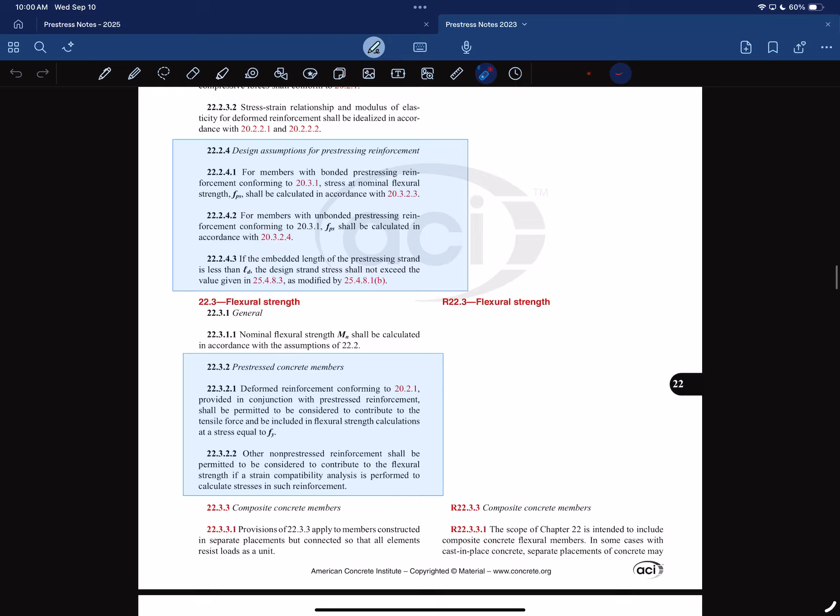Unlucky dude. Lucky and unlucky dude.

You should convince him to go back and go on his trip this weekend so we don't have to go to class on Friday. I agree. What's he doing now? He was supposed to be going on a trip, but his buddy canceled. So now he's not going on the trip, so now we're going to have class.

I was told I wasn't allowed to tell you about this trip, because he said he was going to let you know on Thursday, and it was going to be a surprise. But then I was sworn to secrecy. You swore me to secrecy. I still told you. That came back on me, told him. That's what I told Kyle. I was like, well, I kind of owe them because they're tattling on you, so I owe them.

How'd Tim find out it was me? He didn't. You gave it away. He just assumed it, and you didn't deny it. It was a classic trick, got me.

He got you, right? He was just like, oh, I think it's Kyle. And I didn't deny it. The only thing I broke on was I was using pronouns. I said he, and so he just threw out your name, and then he confronted you, and you gave it away. He doesn't really narrow it down that much in engineering. I took out just a couple, overlap between the two classes. If you said she, that would have been close.

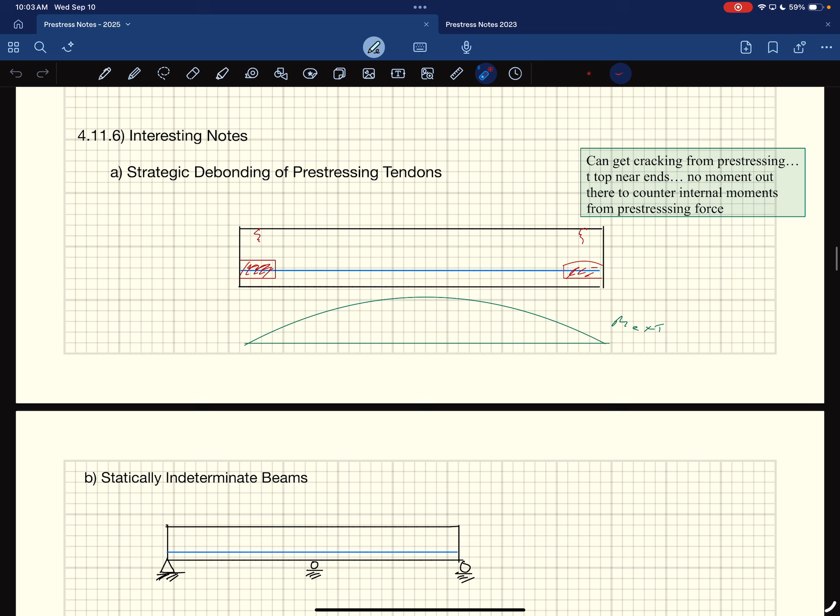So these are Magnel diagrams, but we talked about these being the ways that we design it. We talked about how we're kind of done with the elastic analysis. You're working on, or should be working on, a homework associated with this. We talked about debonding the pre-stressing because near the ends, if you have a constant eccentricity, you have this internal moment, and then there's no external moment to cancel it out, so you could end up with cracking up at the top. But if we debond it near the end, or harp it, or drape it, that prevents having problems there.

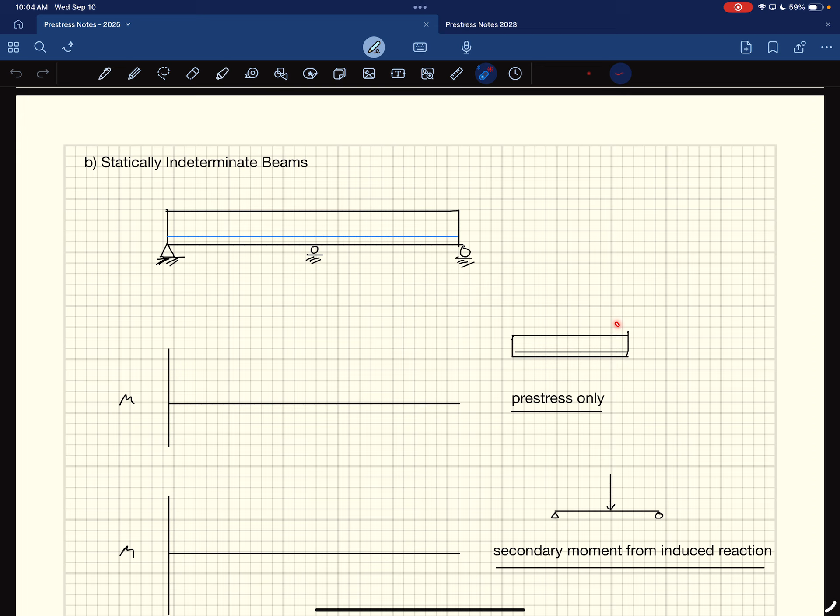Okay, so what we were in the middle of talking about now is statically indeterminate beams. When you have statically indeterminate beams, some weird things can happen, right? So if we have just the pre-stressing only, we're going to break this into pre-stressing and then what effects it has.

So for pre-stressing, the effect would be our moments would look like this. They're not exactly like this though, because there's the whole development length thing happening, and it takes a while to ramp up. In reality, because of development lengths, it's more like this—it kind of ramps up on either end. But just theoretically, if we ignore that component, you get a constant internal moment from this, right?

Because you have that pre-stressing causing this thing to pop up, which is like two big forces down at the bottom, and it's constant along the entire length, right? Also, I said this last time, you wouldn't do this. You wouldn't have that pre-stressing along the bottom knowing that it's supported in the middle. But this is just for describing what's happening, okay?

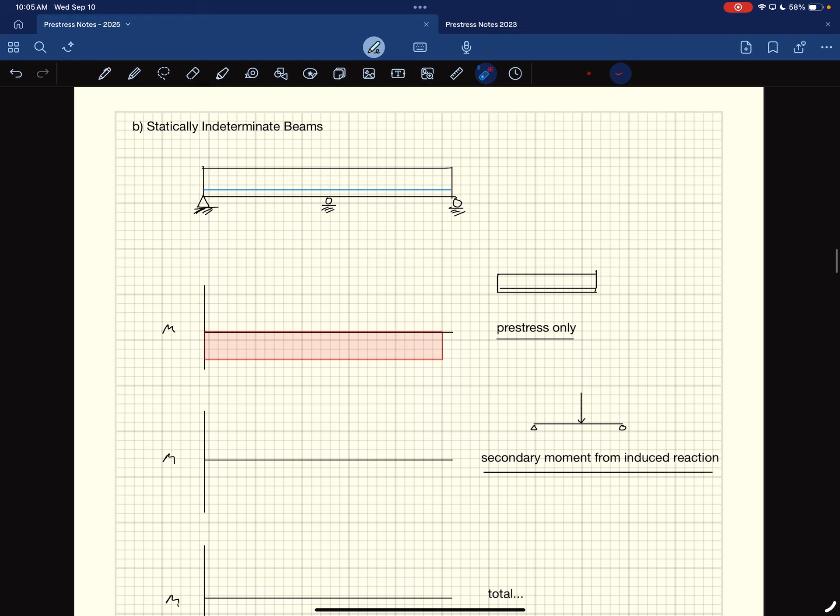So we have that pre-stress only. This will cause the thing to want to pop up, right? You're causing this negative moment. It's going to make this thing pop up. Or you could think of these things as, this is what the moments would look like. Kind of going like this, and it's going to make it want to pop up like that.

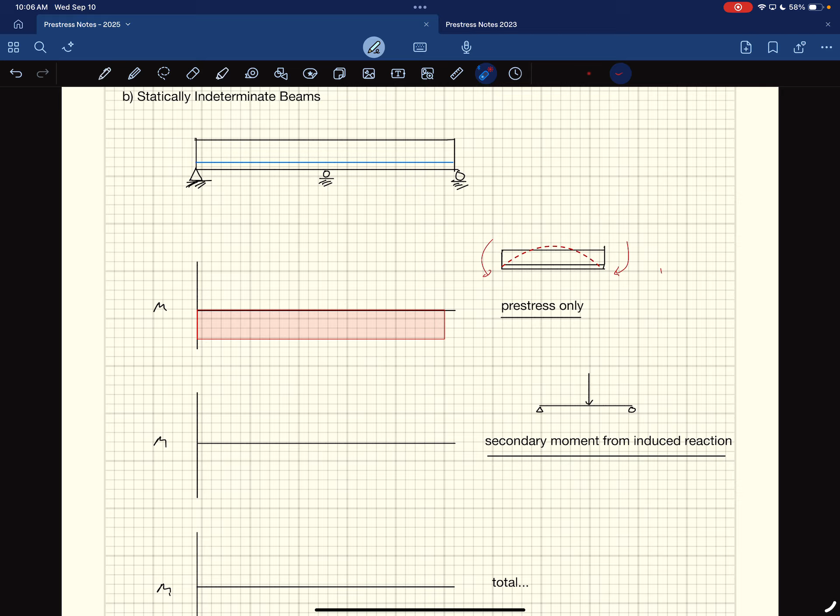But then it can't pop up like that because there is this component right here. There's this point right here. Even though we always draw it as like a bearing, just like a roller, really, it does provide a vertical load as well. And so then that would cause a moment or a force that looks like this. The reaction would cause a downward force in the middle. And the moments from that would look like...

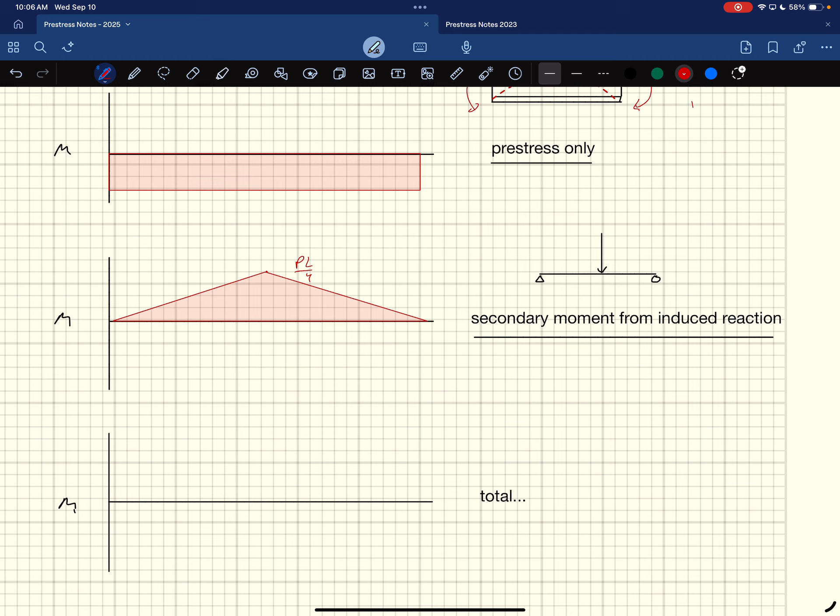I don't want that, I want solid lines. That work? Your moments from there would look like that. And this would be PL over 4, right? And kind of what that moment would look like from just a point load in the middle. And then the total loads, or the total moment, would be the combination of both of those things.

Maybe something like this. The total would look like that, right? These moments caused by that fixed support, Stanton calls them the secondary moments. He calls them secondary moments because they're not from an external load. They're actually from the internal load, and they come about because of that support condition there, and they resist the deflections that internal moment would want to cause.

Kyle, when he teaches our class, these come about a lot, like I mentioned before, in post-tension floor design, because you're going like this as you go along, and you're not going to be perfect with that as you're going up and down as you go across. And there's going to be parts where you have this secondary moment that comes about, okay?

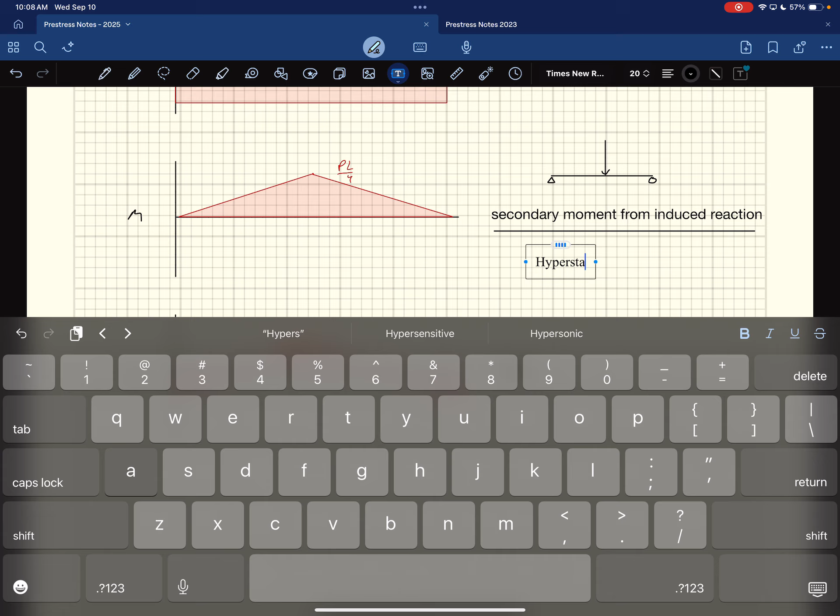And they call this hyperstatic. They're called hyperstatic moments, that's how you use it. I had never heard that term. Stanton doesn't use that term, but Kyle uses that term.

Everybody kind of see that? This is a thing, and we're going to see it at some point. That's about all I want you to do with it. We're not actually going to calculate any of the stuff, but just that this exists, and be wary of it. And then computer programs will calculate it for you because it gets pretty complicated.

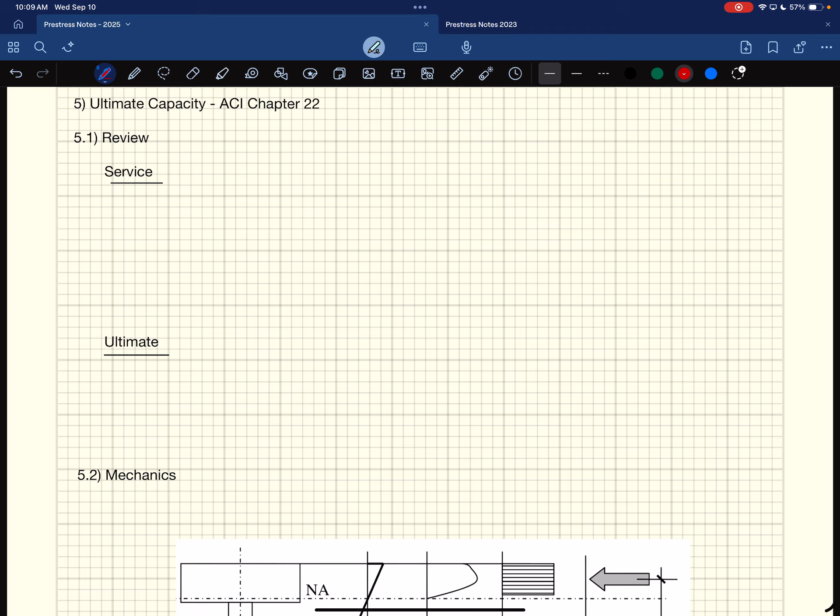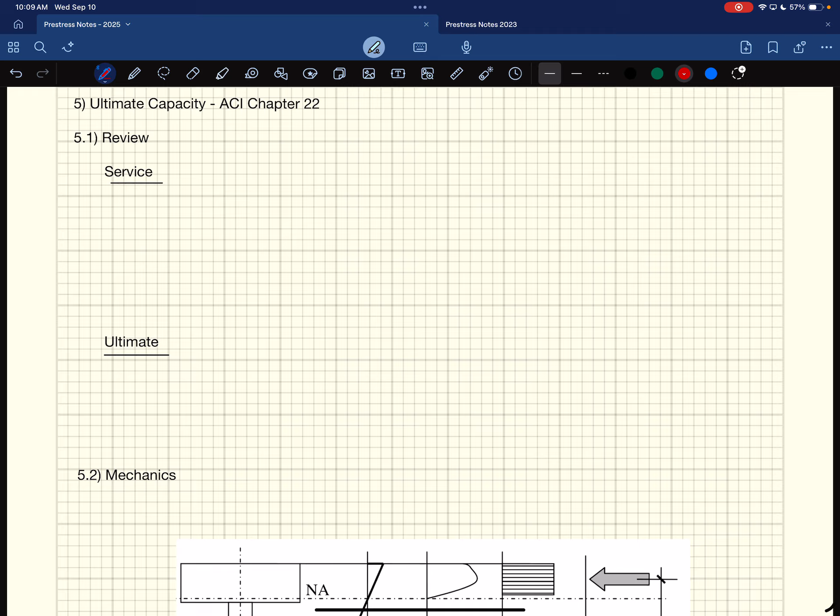I already called Hudson out, but you got yours in. Did you get yours in? I didn't see yours in there. Yeah, you did? I did. Grade school? Yeah, I didn't see it. You look - good acting, by the way. Any other guilty people? By the way, I heard Will 1 just got demoted back down to Will 3. But Tim's not willing to put you up at Will 2 yet. Because he's not going to grad school, so he bumped it back down. He said he's not going to grad school, so Tim demoted him back down to Will 3. So currently there's no Will 1. Still Will 2, you're still Will 2. Yeah, he didn't promote you, you're still Will 2. Just make sure you call Will out when you see him, that he's back down to Will 3. And then he was arguing this morning that he wasn't technically Will 3 again, and he was having a conversation, and then Tim walked around the corner and goes, 'Oh yeah, you're Will 3.' So it's happening.

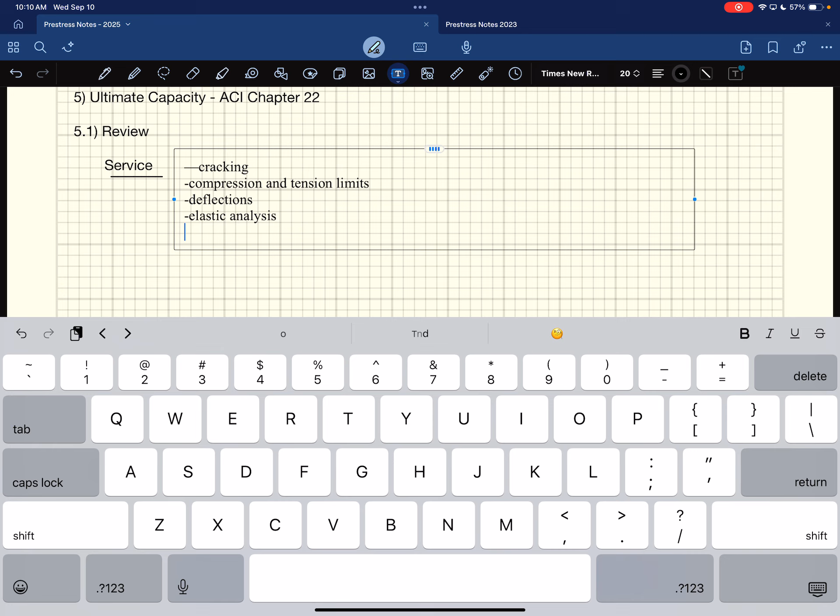Cracking. Okay, so things that we dealt with in service loads, just kind of point these things out. What we cared about is cracking, we cared about compression and tension limits. And this is backwards, right? Usually we care about life safety first, but in pre-stress, we flip it around. This is all elastic analysis, just throwing some words out there. We deal with service loads when we do these things, okay? And then people don't die if you mess this up.

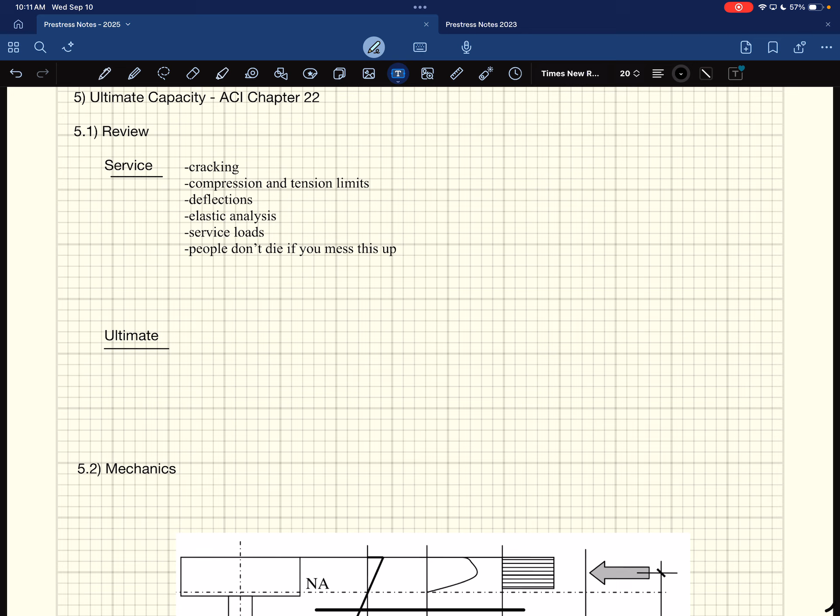People don't die if you mess this up, right? And because of that, we use service loads. You're doing elastic analysis, but we do start with service. We haven't talked about deflections yet - that's coming, that's one of the next things we'll look at, calculating deflection. It turns out it's really hard, but we have looked at the cracking and the compression and tension limits.

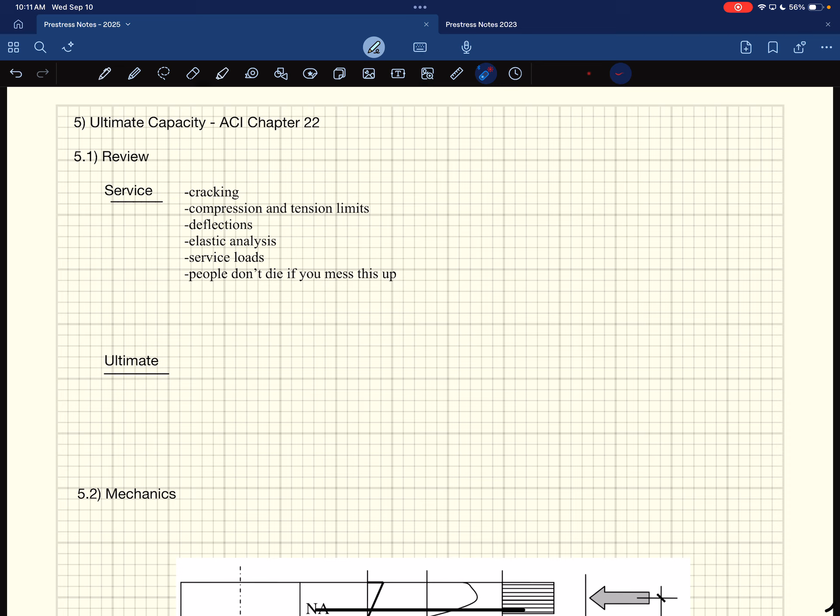Okay, but now we obviously do care if people die. So after you get done designing the beam to meet the requirements up above, we then come back and design for the ultimate load. Right? People could die if you mess this up.

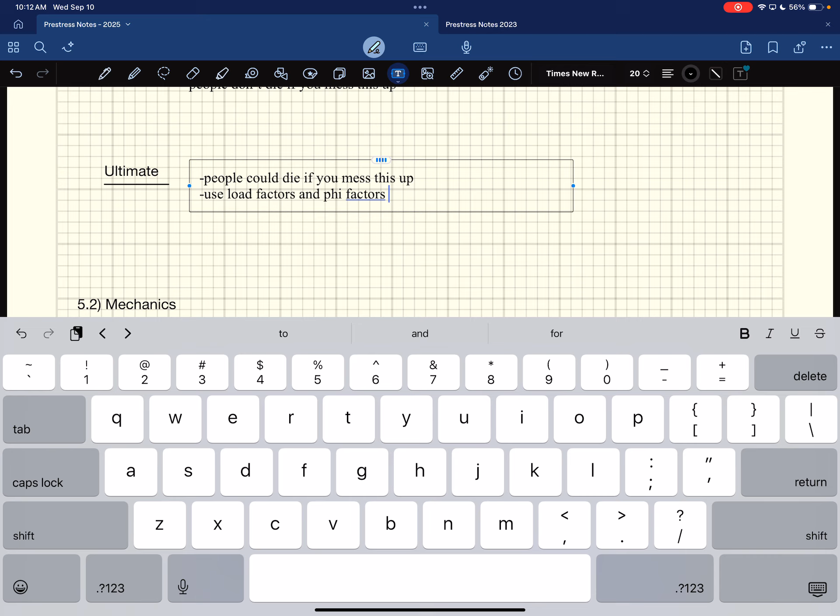Therefore, we use load factors and phi factors. Thus far we haven't used those - there hasn't been any talk of factoring our loads or reducing our capacities. That's what they do. With LRFD, we pretend our loads are bigger than they actually are, and then we pretend our capacities are less than they actually are. And that way we have factors of safety coming from both sides.

And so we also use nonlinear analysis. This is more accurate, less conservative.

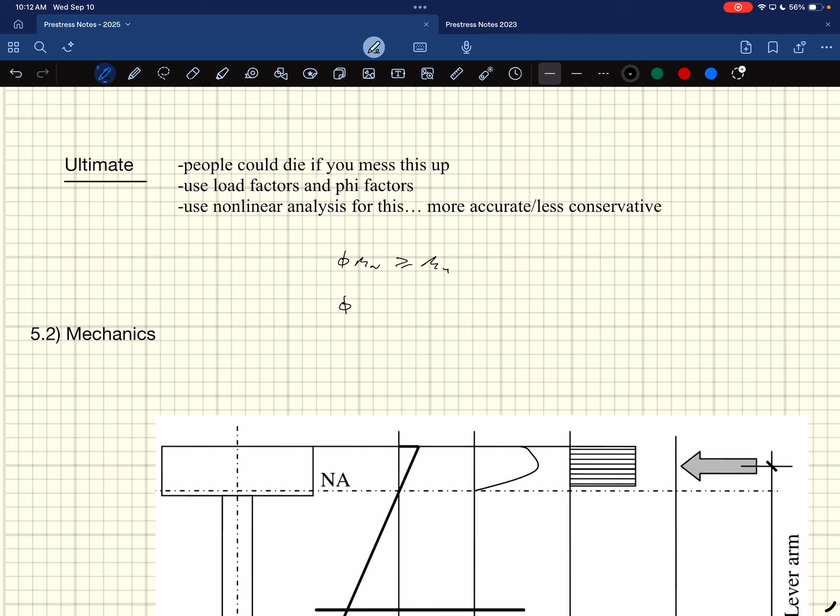And what we're going to talk about in this class - these are what we have to make sure happens. Phi Mn has to be greater than or equal to Mu, and phi Vn has to be greater than or equal to Vu. We're going to do both of these. We're going to start out with the moment capacity. We're not going to spend much time on Mu, what our demands are, but we are going to focus on the phi Mn side of things. And then we'll go on to phi Vn, which actually gets pretty complicated when we do that.

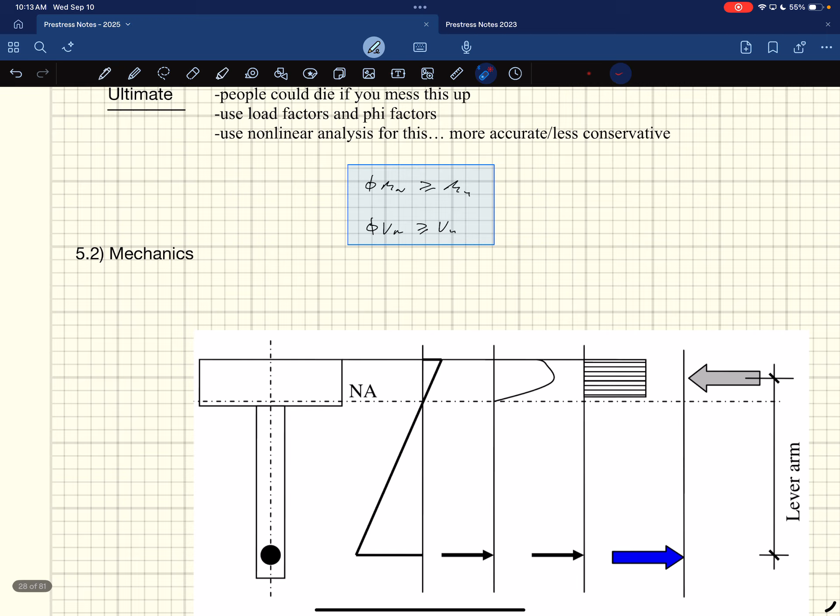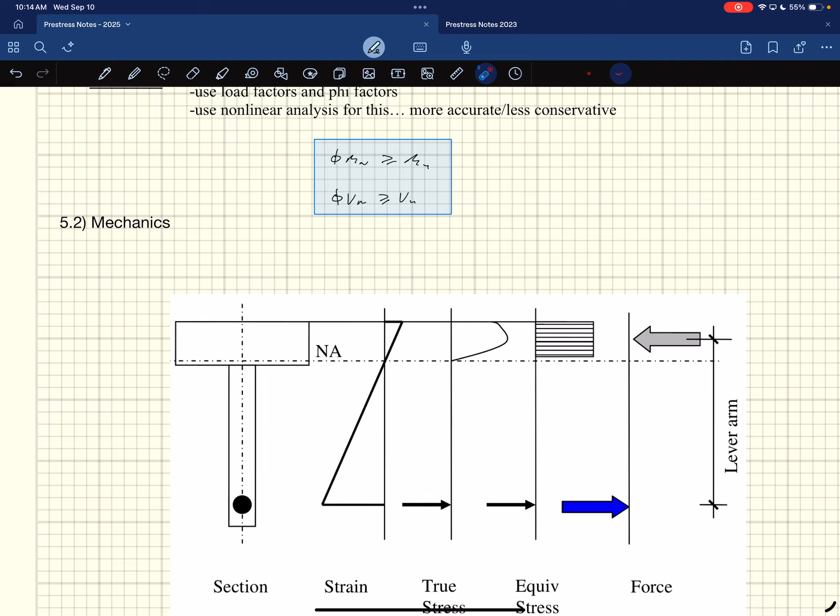Also, you'd be surprised how many people mess this up in structures too. They flip these around - they say that phi Mn has to be less than Mu, and you've probably seen it in some homeworks, right Kira? No, you haven't seen it yet. On exams, people throw that. They flip it around and they're like, 'that worked, therefore you're okay.' You're like, oh my god, we're gonna guarantee people are gonna die. It seems pretty obvious, but capacity has to be greater than demand, right? And if you flip that... I think it's just a brain fart, but they're panicking on an exam, still pretty funny. Do they just mix up the variables, or do they mix up the numbers too? I know they calculate this number and that number, and they're like great, and it'll be not good, and they'll say, oh that worked, we're good to go. You're like, oh god, the opposite, for fuck's sake. If you get anything out of this class, make sure your capacity exceeds the demand, no matter what. And then they mess it up. At least you find the point where they bifurcate. But now I just want to pull the card, be like, all right, you're done, you're not going. It's done, you're out.

Okay, so when we calculate this, I've got to mention this - this hurts me. As an academic, I really like this thing called the strain compatibility way of calculating capacities, and it takes literally 3 days to teach you guys how to do it. And this year, I'm not gonna do it, and it pisses me off. All our notes have it built in, so I've got to work my way around it. I'm as an academic, I'm gonna still discuss it with you a little bit, but I'm not gonna make you do it. The reason is I want to spend more time on post-tension floor design, because I know as a real engineer, you will never use strain compatibility, even though it's super cool. You won't do it in the real world, and it pains me to do this.

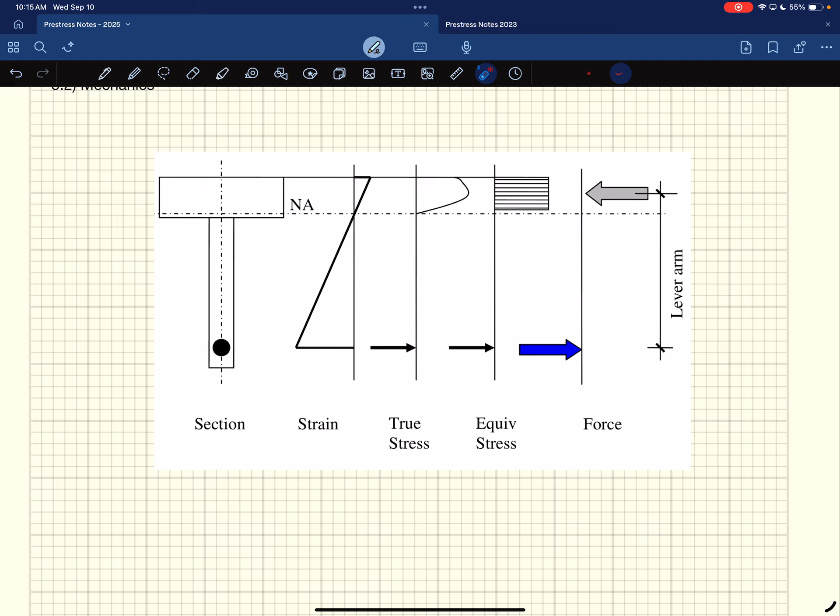So this is just a review, and we'll talk about how it differs from pre-stressed concrete. But this is just a review of standard analysis, you'd do this on regular reinforced concrete as well, right?

So you start out, here's what your cross section looks like, and you've got your big pre-stressing down at the bottom, right? So this is obviously a T-shaped section. So what you do is you start out with the strains, right? You make the same assumptions, plane sections remain plane. You have a strain distribution going across like this.

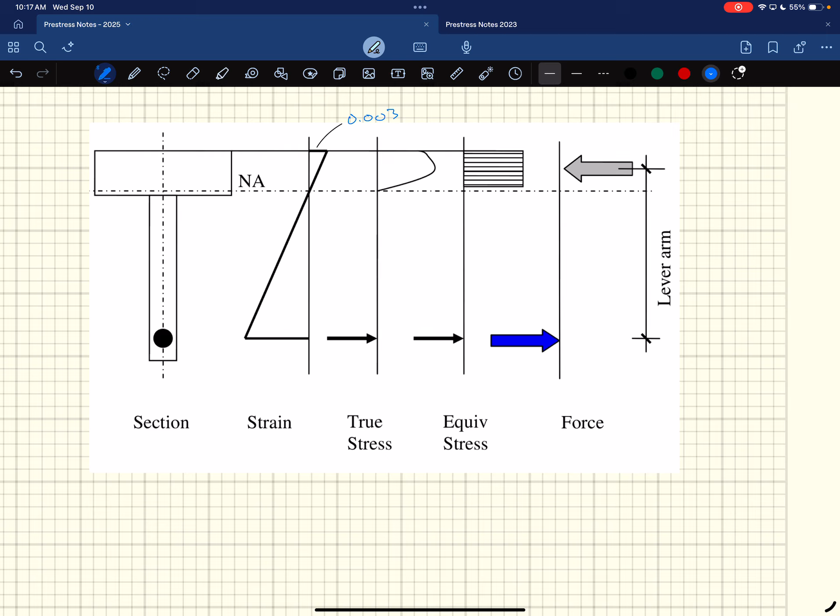What is this strain up here at the top? 0.003, right? We make that assumption always, that's the strain at which concrete crushes. We still make that assumption, the strain in the concrete is going to be 0.003, right? Down at the bottom here, we'll call this epsilon sub PS or epsilon sub PU. It'll be one of those, we'll differentiate them in a little bit, okay?

Given those strains, given the strain distribution like that, and assuming it's linear, given those strains, you can calculate where that neutral axis is. That's going to be a function of x. That distance right there is going to be x. That's what we end up ultimately solving for, is where that neutral axis is, right? So it's kind of unknown when we go in here is what that neutral axis is, right?

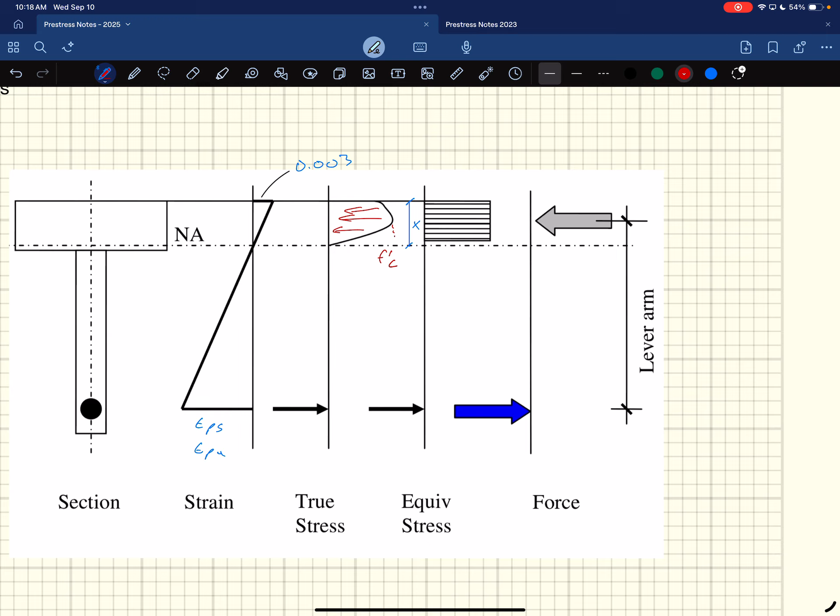What my actual concrete strains are doing is this, or stresses rather. It's a nonlinear stress distribution, right? This right here would be your F prime C. Down here at the bottom, you'd have FPS, our stress in our pre-stressing would be what we call FPS down at the bottom, right? To make things a little bit easier, we use this block right here. What's that block called? Whitney stress block.

So this is all just review on regular reinforced concrete, we use the same mechanics, right? 0.85 F prime C is that dimension. This dimension is beta 1 times X, right? We call it A a lot of times.

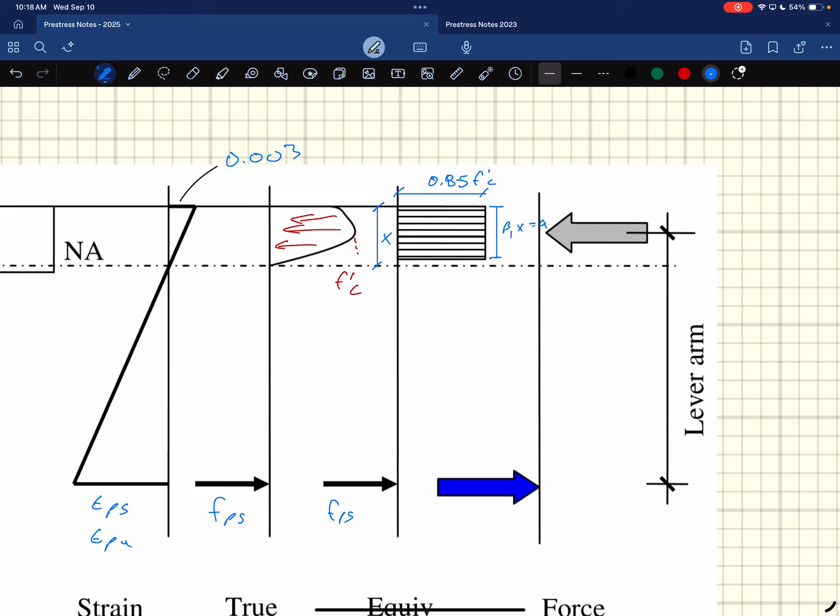Okay, same thing down here, this is still just FPS. Okay, and so that's what you do, you go strain, you go section, strain, stresses, equivalent stresses, and then you go on to forces, right? You take the forces, you just take these stresses down here and multiply them by their areas. So up here, this is just going to be C is equal to 0.85 F prime C, A times B. This would be B up here.

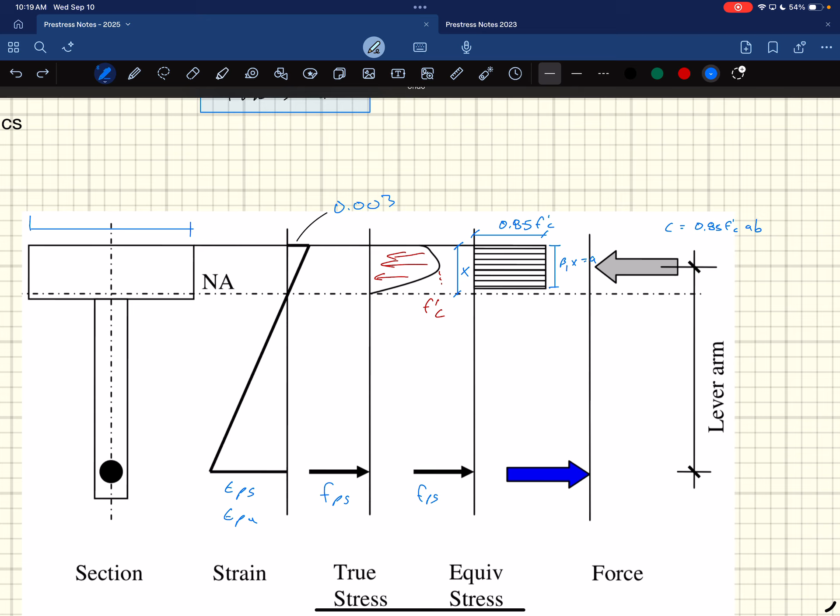This would only work if it stays up, it only works if it stays up in the flange up there. This equation right here only works if it stays up there. If it starts dipping down, then you have to do more stuff to it, there'll be more components that go into that compression force, right?

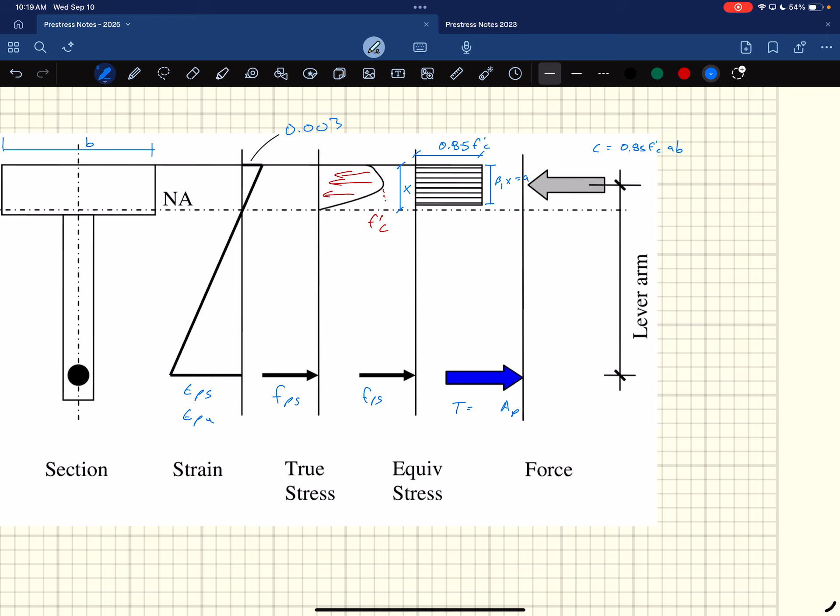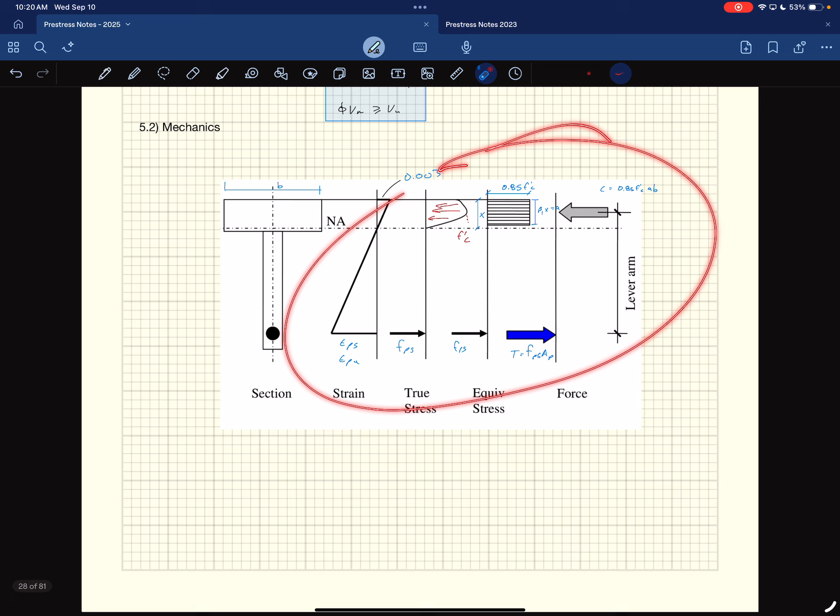And then down at the bottom, that T, FPS times AP. That's an F there. Times AP, okay? And what we do to solve this, right? Like I said, the only unknown in this, well there's a couple unknowns, we'll talk about that. But really, usually, if I know what my FPS is, if I could tell you what the FPS is, the only unknown in this is that A, where the neutral axis is.

So what you do is that this T has to be equal to this C, right? C equals T, that has to happen, otherwise this thing would be accelerating, right? It would be spinning, right? So C has to be equal to T to have that equilibrium, right? And so that's what you do, you set C equal to T, you apply equilibrium, and solve for A or X.

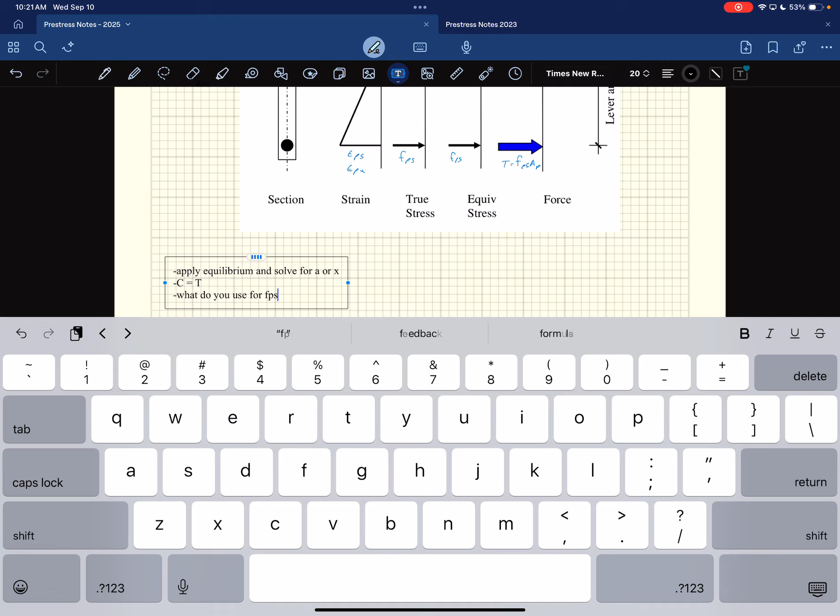Right? What is that, A or X? By applying that, you set C equal to T. But where things get complicated, you're like, oh, I could do that. Where things get complicated is, what do you use for...

FPS? In regular reinforced concrete, we assume that's FY. We assume, and actually the code tells you that has to happen. If you're doing a regular reinforced concrete beam, your steel has to yield, you have to go beyond that yield. We don't have a yield point because this is the pre-stressing strands. These are the pre-stressing strands, they don't have a yield point.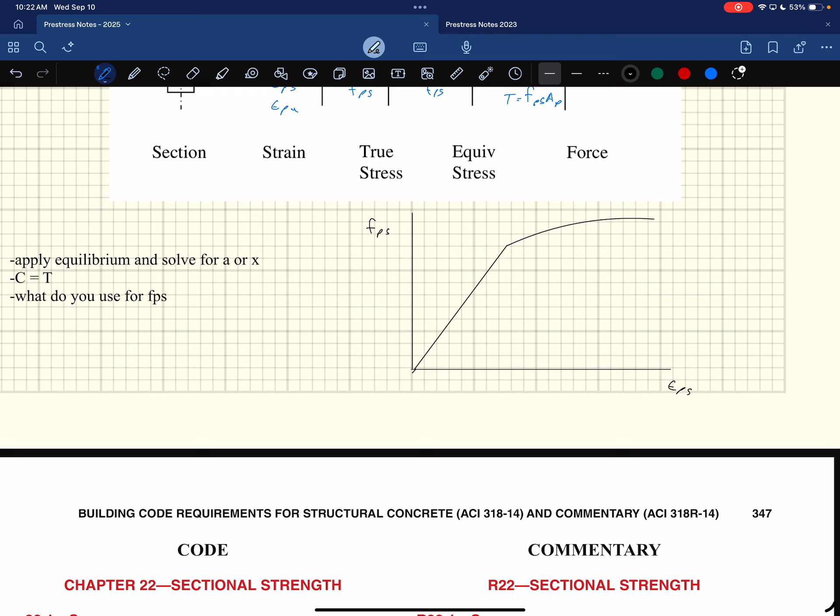And so what do we use? But it's not, FY doesn't necessarily make sense. And then also to complicate things, before you've even loaded this, that steel is already loaded, because it's been stretched first. You stretch it first, you cast the concrete, and then you release it. So it has an FPS in it to begin with. That's our pre-stressing force, so it's already being squished. So you start here someplace, you've already stressed it out to there. And then you're applying a load, and then now that load is going to change.

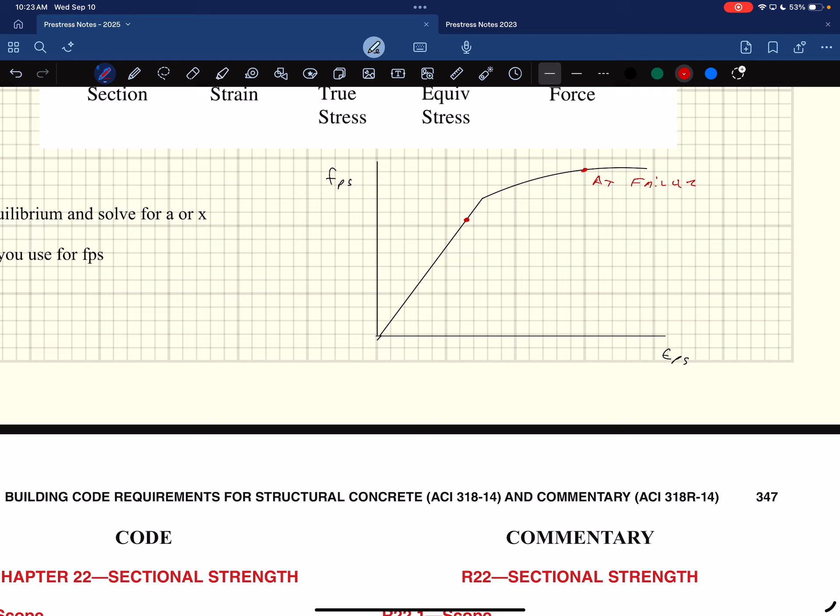In elastic analysis, we assume that the load didn't change FPS. Now it does, now we're talking about ultimate loads right at failure. Now there's a bunch of deflection that happens, and it's going to move to failure out here someplace. It doesn't have to be at the peak, but it's just going to move to the right some at failure.

Tendons start this process already stressed. Stress then moves to right when ultimate loads are applied. But how far?

And so right now I'm just setting the stage for this, that they're going to move to the right. They're already pre-stressed, they're going to move to the right. There is no such thing as an FY necessarily. So what are they going to go to? And that's where this strain compatibility comes in.

Is like if I had this equation, if I had this written as an equation, I could calculate what the amount of strain it's at, and then what the strain's going to be at failure. And then I could just plug it into this equation and get what FPS is. And that's strain compatibility. It's beautiful, okay?

Or what you're really going to do is the code gives you a value for that. I know that's what you're gonna do, you're lazy, except for three of you. And honestly, I would do it too, just because you can make mistakes if you're trying to do it. You gain very little by doing the strain compatibility. And so ACI, they punt.

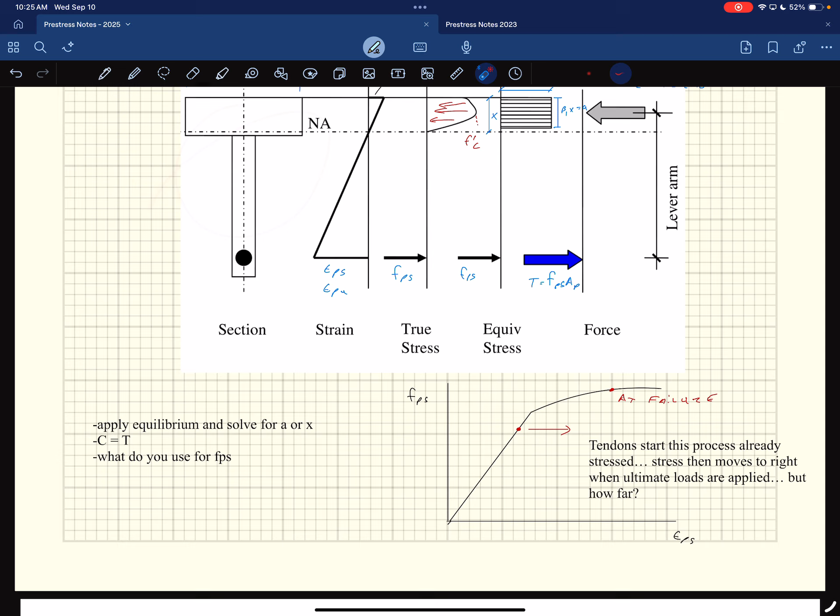They just say, hey, here's an empirical equation for what you use for FPS, period. And it's a function, it's empirical, so it's a function of a bunch of properties of the cross section. We'll look at it in a few minutes. But you just go through and it calculates FPS. So then you come back to this, and this is going to be a known value that we get from the code, and then the only unknown is going to be A, and we solve for A and then move on. So, but there are some other differences as well.

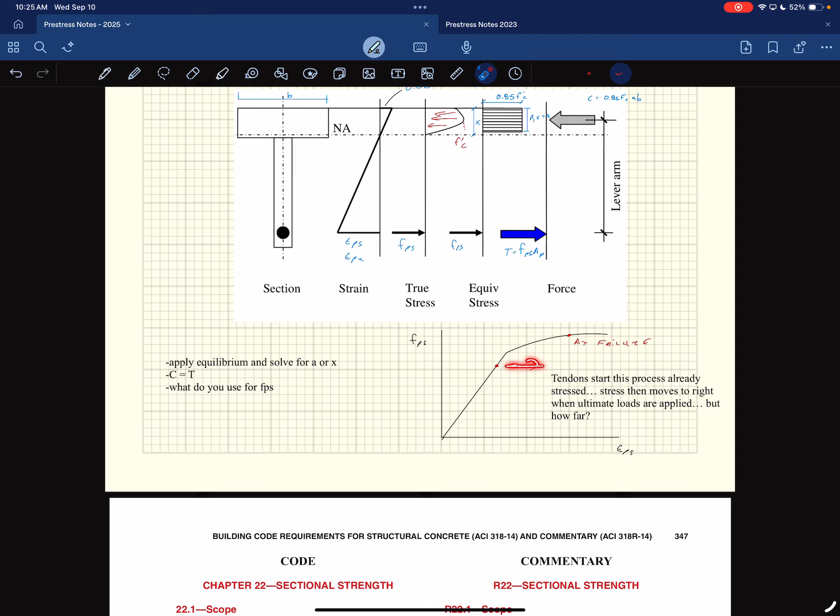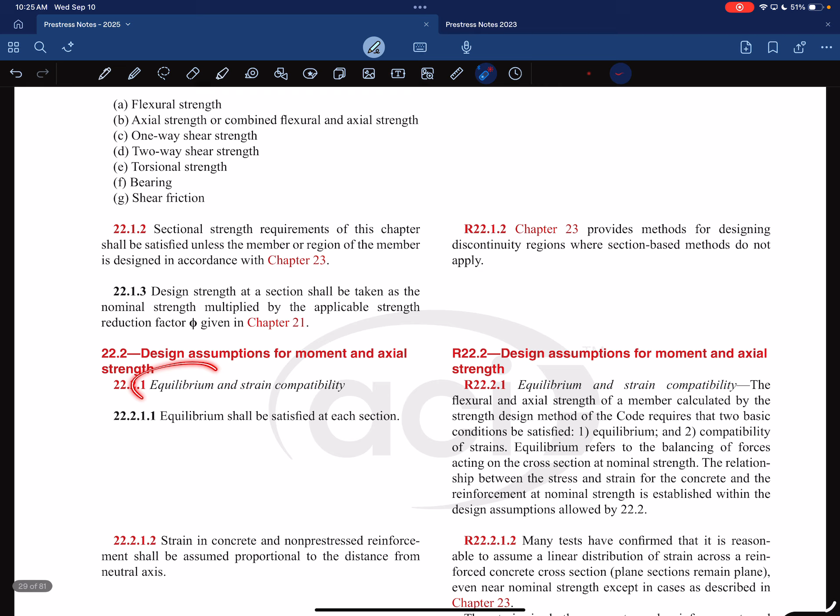This is ACI chapter 22. It's under the same section that you do for regular reinforced concrete. This is chapter 22, sectional strength, and this is where you find it. And you may not have noticed this, this is where they define all, you have to satisfy equilibrium and strain compatibility, and then equilibrium is satisfied at each section.

It's interesting how they, Tim, obviously shits on concrete a lot, because it's a big guessing game, where steel is just like pure and there's exact answers for things, and when you say the capacity is going to be something, it actually is that.

If you don't remember Structures 2, when you pull those things, it's exactly right, exactly how you calculated it.

I just think the reason Tim likes steel so much is because it's easy, and his puny brain can't handle the complexities of concrete. If you're a true concrete man, you're smart enough to do it.

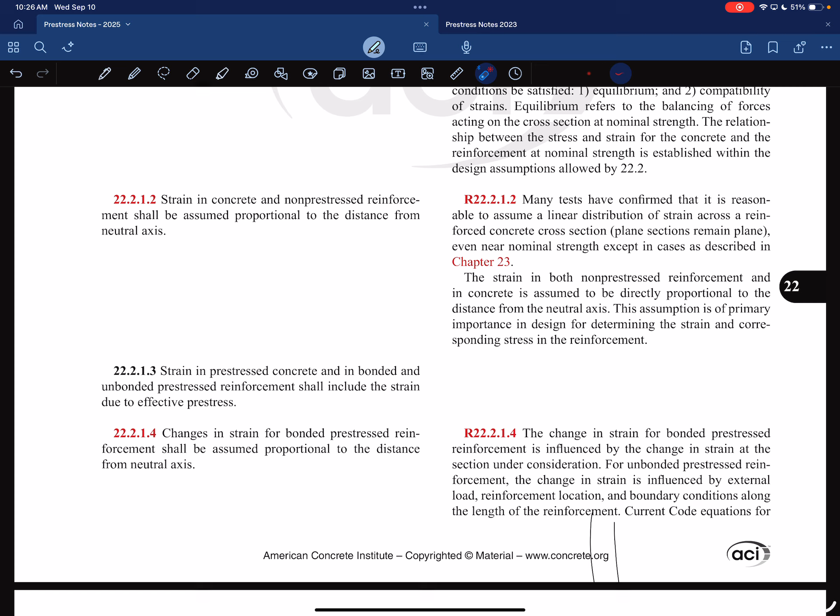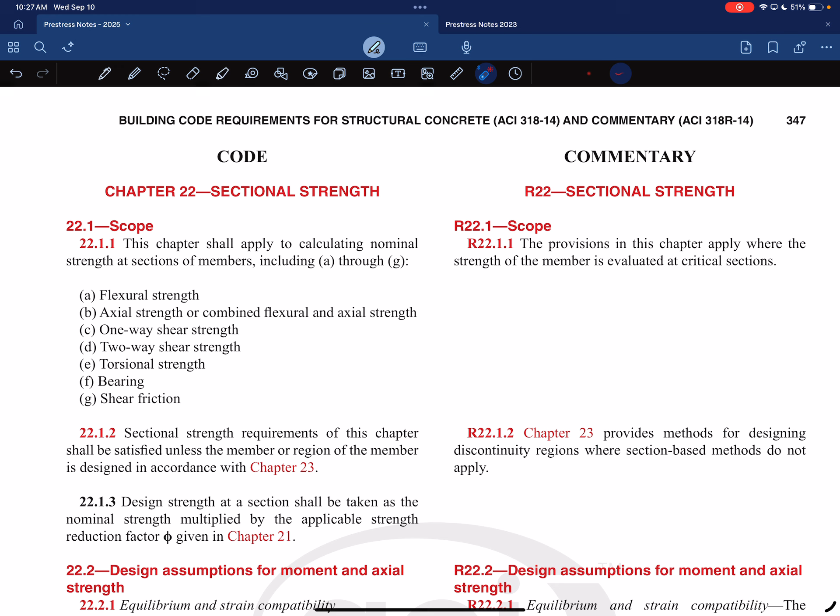But my point is this: concrete, it's mixed with a shovel, right? It's a bunch of rocks, and it's weird. It's guessing, because it breaks at really weird things, and he's absolutely right. It is hard and confusing, and the code is weird, how it's structured—there's stuff in one spot and then way over in another. It's all over the place, and you just gotta be part of the brotherhood. You gotta just know, like what each of these things are and where to find things.

But if you actually look at it, to see where it calculates this stuff, it never really says use this equation for calculating capacity. In the code, in words, it tells you this, but it doesn't ever lay it out or show you a picture for doing it. It just says your stresses can either be this, or you could use the Whitney stress block like this. You have to make sure equilibrium applies, but then you have to make sure these strains down below reach a certain value. It's really spread out all over the place.

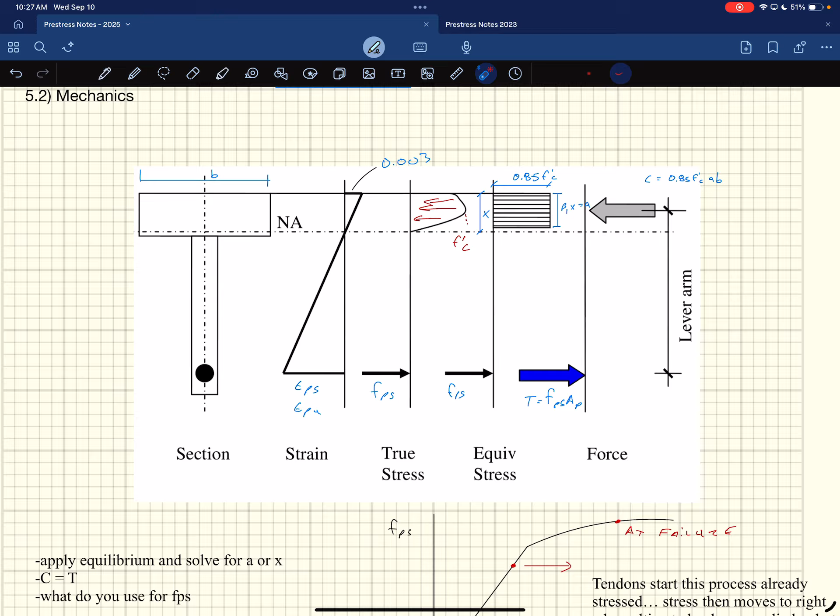But I just wanted to show you where it does mention pre-stressing. This is chapter 22. We work our way through chapter 22, all the same stuff. Here's your 0.003 for the extreme compression fiber that we talked about. Tensile strength shall be neglected, right?

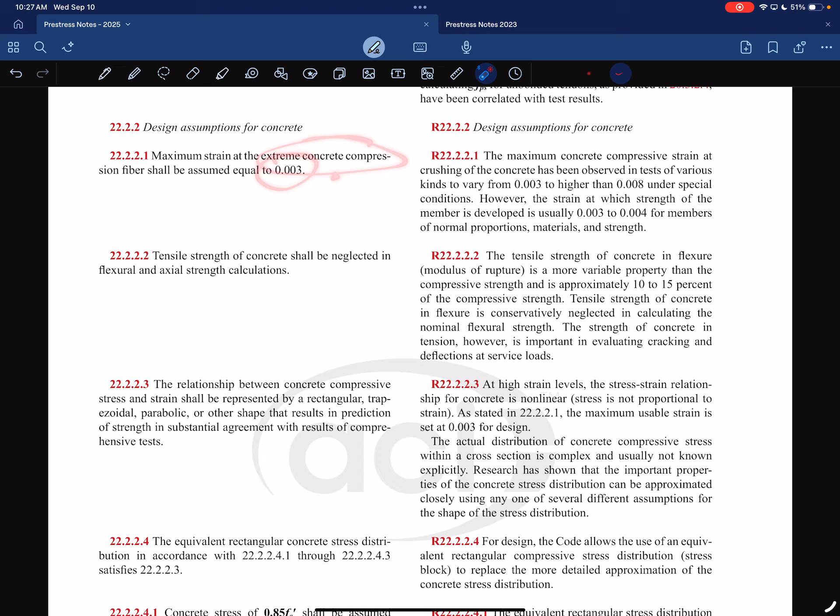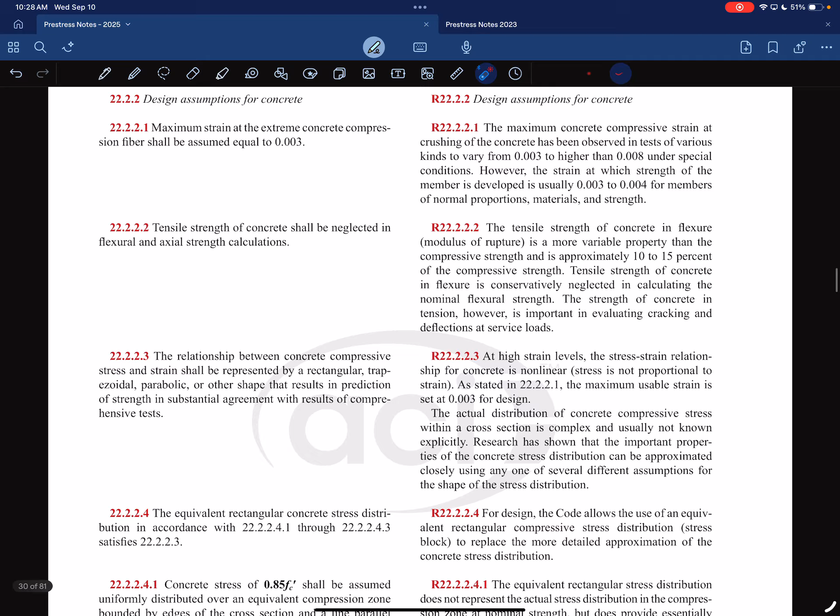We ignore—I guess I left that part out. When this goes into tension, we just ignore the concrete. Technically, the concrete does have some tensile capacity, it would keep going that direction with some tensile, but we ignore it. The reason we ignore it is because it says right in here—it says you can ignore it. You don't have to, but you can, which most people would do.

Keeps going. This is where your A is beta 1 times C. It tells you what beta 1 is going to be, here's where beta 1 is at. Deformed reinforcement, all this stuff down here—development lengths, flexural strength, general.

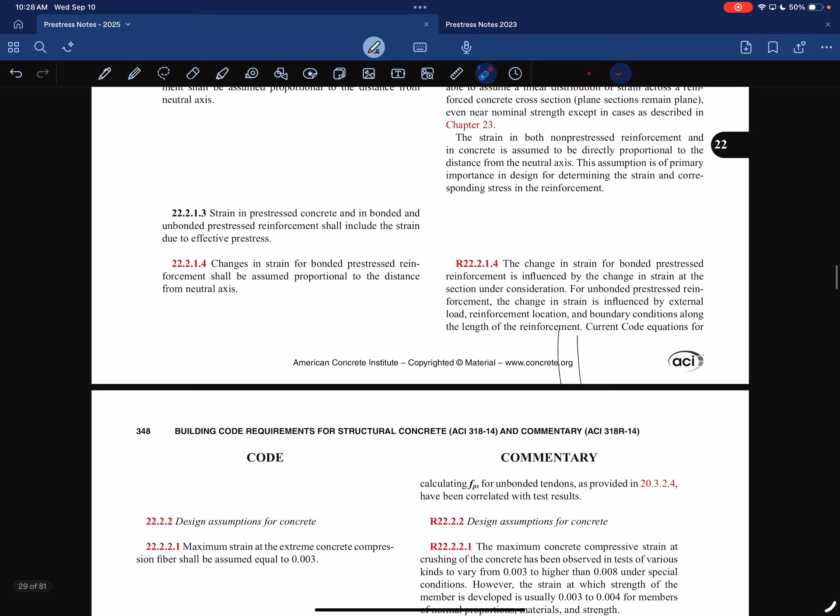Keep going. Concrete—oh shit, nothing's highlighted because I haven't highlighted it yet. So, 22.2.1.3. Here we go.

So they slip this in under where all our other stuff is at. Strain in pre-stressed concrete and in bonded and unbonded pre-stress reinforcement shall include the strain due to effective pre-stress. Oh, no shit—but it tells you that. That's just saying you have to take into consideration that it's already been strained and stressed. Clearly it'd be weird to not include the fact that it's already stretched, but it just tells you you have to do it.

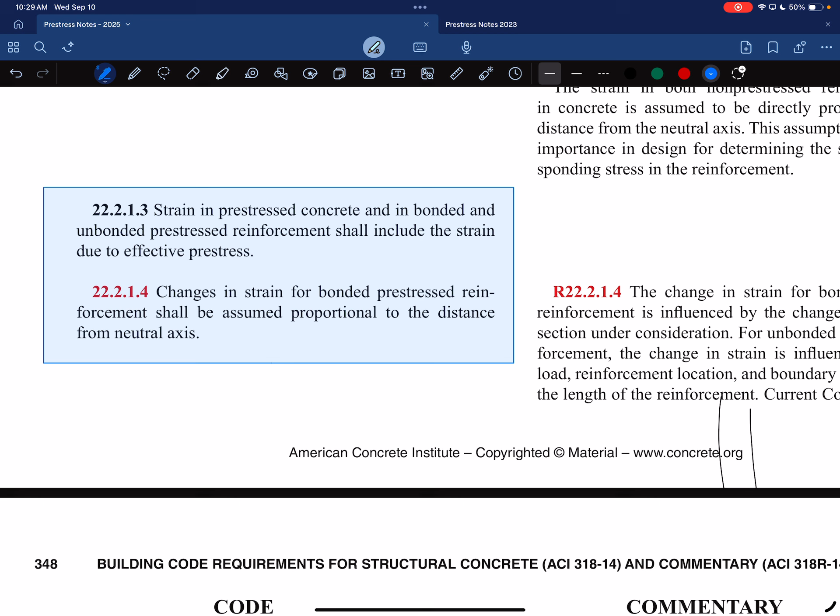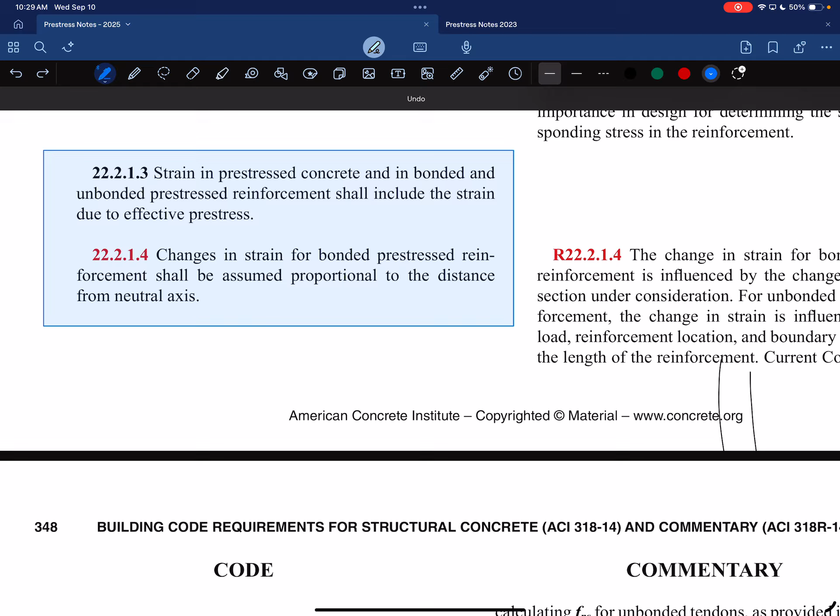Changes in strain for bonded pre-stress reinforcement shall be assumed to be proportional to the distance from the neutral axis. So that's just saying I could calculate my additional strain in the pre-stressing based off this point right here, using similar triangles, the 0.003, the distance x right there, and then calculate what this strain is and assume that's the same strain in the pre-stressing—the additional strain in the pre-stressing, to the right there. And I get that from this guy right here.

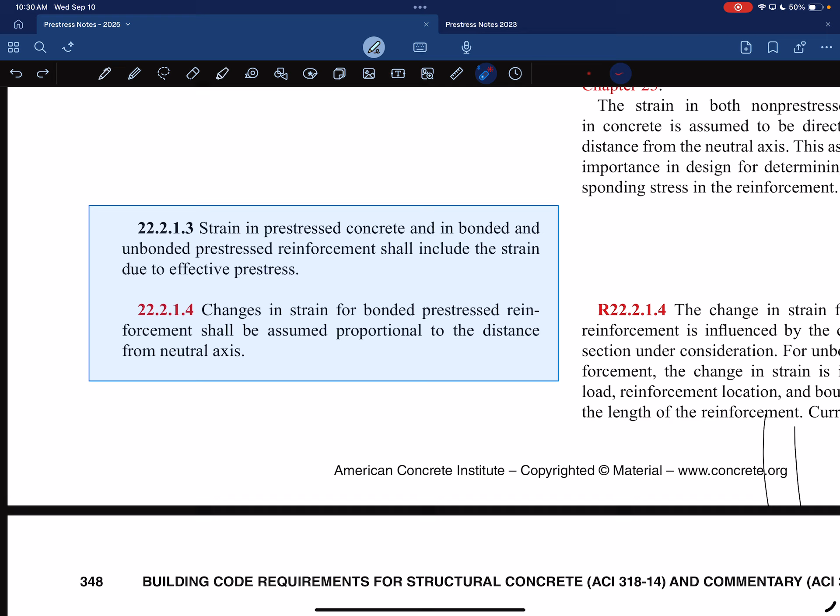Note that it says for bonded—you can't make that same assumption for post-tension, because post-tension is not bonded. The concrete and the steel can change independently of each other, because they're not attached. In regular reinforced concrete, you have deformed bars with concrete cast around it, and if the concrete moves, the steel moves with it. Same thing with bonded reinforcement. If it's unbonded, that's not the case—the concrete can move and the steel can stay put and slide around. So you have to treat the bonded or unbonded post-tensioning differently than the bonded reinforcement. That's one spot where it talks about it.

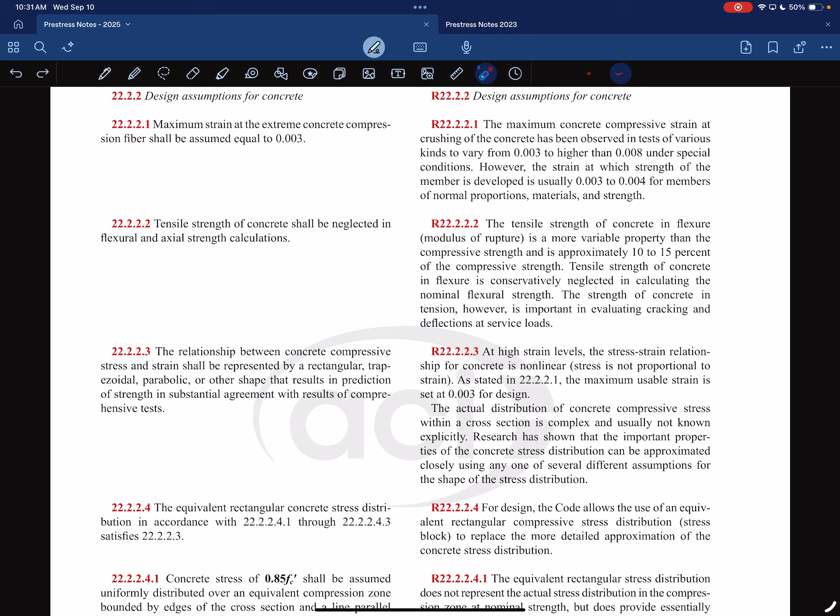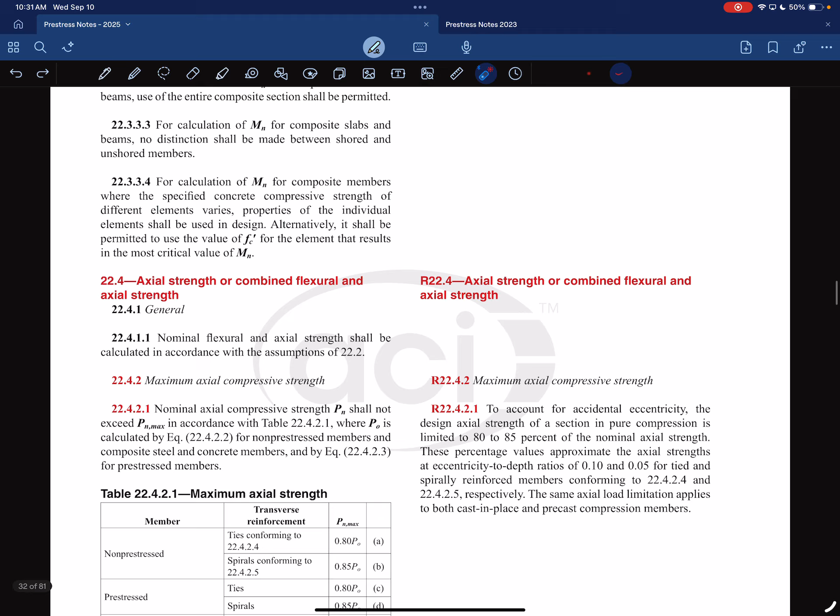22.2.4. Design assumption for pre-stressing.

Note how hard they're working out there—there's one person out there for the whole side of the building. They have one guy out here. He's lowering it down.

Just gonna tell him they're doing it wrong. Get out of here. You did it wrong, they're gonna be out here longer. Or you can see they cut little lines for the flashing above each window. See that? So we gotta listen to them. Oh, this is gonna be a long time.

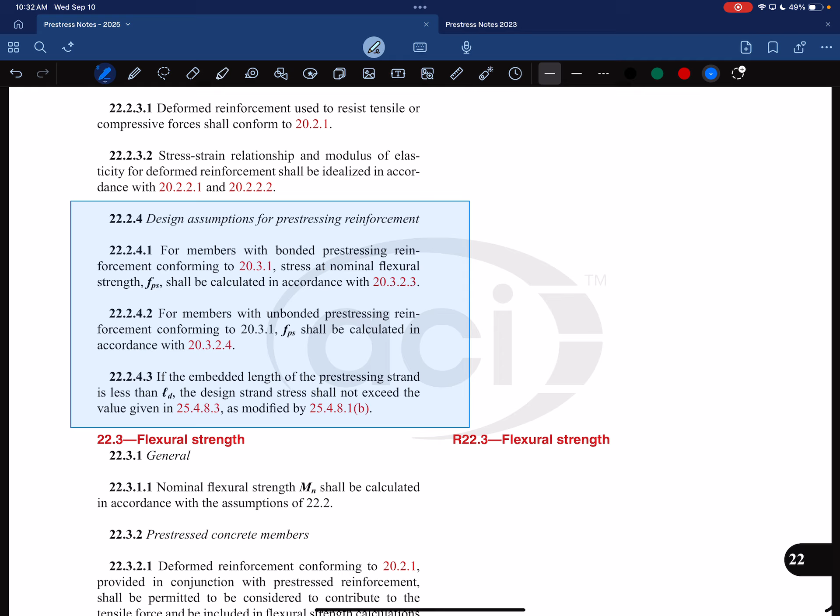Oh, they said they're gonna go till the end of October and start back up in April. Maybe I can, yeah right. They're gonna start back up. Maybe find us another room, a cool room somewhere. Is there gonna be another room I open? Don't know, probably not. This one's supposed to be MLC. Yeah, where you're at, right?

All right, so design assumptions for pre-stressing. There's some more information here, right?

For members with bonded pre-stressing reinforcement conforming to 20.3.1, stresses at nominal flexure strength, FPS, shall be calculated in accordance with 20.3.2.3. That's sons of bitches, right? They don't put it here, they put it in 20.3.2.3. I gotta go over there to see what FPS is, right? That's what I'm saying, it's all the stuff all over the place.

For members with unbonded pre-stressing reinforcement conforming to 20.3.1, so this is for the unbonded, right? FPS, we use this. That's what we're going to do, right? That's what you're going to do in the real world. You're going to go in and use this guy, or use this guy. These are just two empirical equations. We'll look at them in a few minutes. You calculate them based off of the material properties, and then you move from there, right? That's what I would recommend doing.

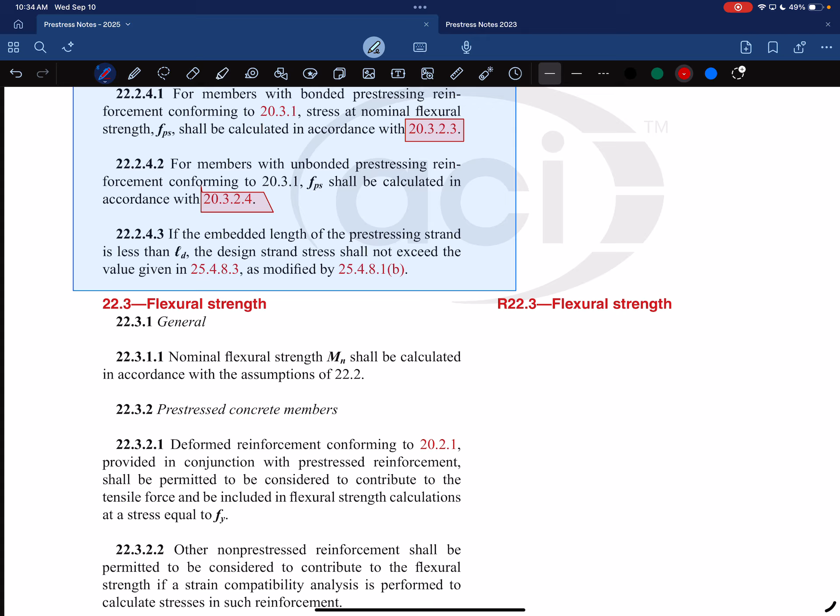If embedded length for pre-stressing strand is less than LD, the design strand shall not exceed the value given. So basically if you haven't gotten development length, you can't go beyond a certain value. Okay, we go down to flexural strength, pre-stressed concrete members, another part right here.

20.3.2.3. Okay, right here, 20.3.2. Yeah, right here. Okay.

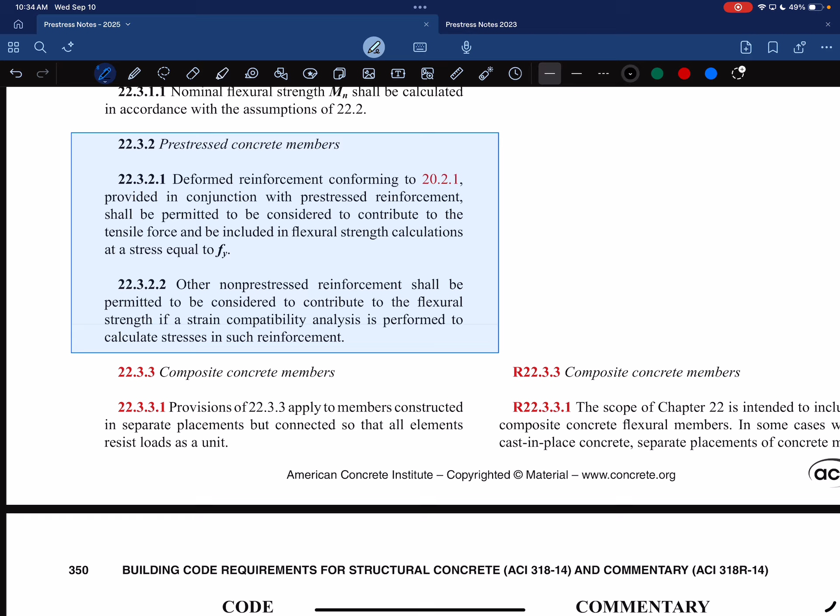Deformed reinforcement conforming to 20.2.1, provided in conjunction with the pre-stressed reinforcement, shall be permitted to be considered to contribute to the tensile force. So the same thing for other non-pre-stressed reinforcement shall be permitted to be counted. So if there's other steel in there, you can count the other steel. That's what that's saying, right? And that happens sometimes, and we'll talk about why we do that. But instead of just having a big pre-stressing strand down at the bottom, you could put in mild reinforcement as well, right? You could put in just rebar in there as well.

Post-tensioning is different, it's a little weird, right? Because in post-tensioning, that's really weird because it's cast within the concrete. You have the post, and then you come back and pre-tension it, which means you're taking all that tension reinforcement and it's going into compression initially, right? Because you're squishing it and it squishes along with the concrete, but it gets used. And then later on, when we talk about the full load, it will get engaged in the tension region when things start cracking as we apply the full load.

Pre-tension members, absolutely, they use them in there, right? Because in there you take concrete, you have all this rebar, and you have a pre-stressing strand in there. You stress the pre-stressing strand, your other concrete or other steel is just waiting there, and you cast concrete around it, and then you release it. I guess the same thing will happen there too, right? When you release it, that steel is going to go into compression, which is fine, right? But you get to count that steel for the ultimate load too.

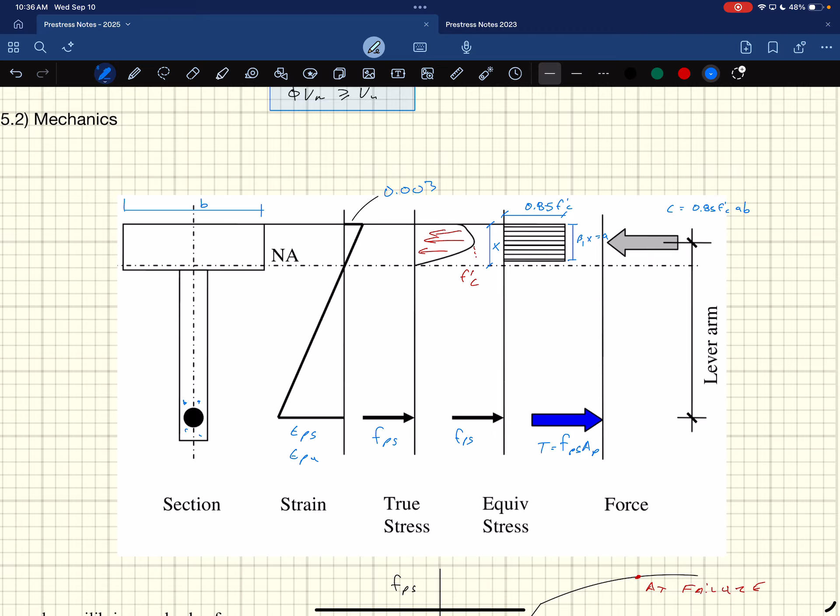But it's different though, right? Because that steel is regular mild steel that has a yield plateau, right? It goes up and then it yields and goes from there. And I think, does it say something about shall be permitted to be considered to contribute to the tensile force of other non-pre-stressed shall be... no, it doesn't say anything about that. That could be FY, but it could be. So you could add in some additional regular reinforcement as well to increase your moment capacity. And if you do that, it doesn't really affect - we'll get into that.

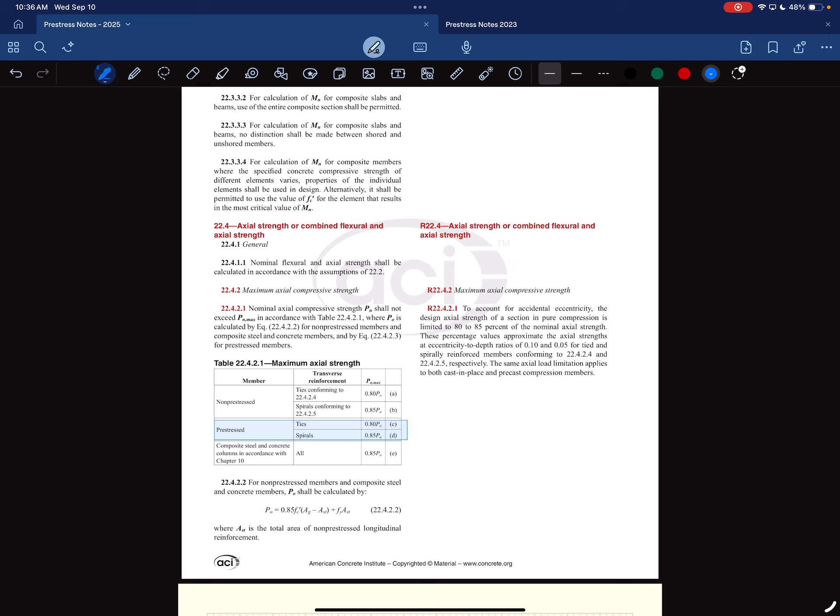We'll talk about that later. There's some reasons why you would include that and not just include more tension reinforcement—that's where it's mentioned. You may not have even noticed it. I guess there's pre-tension here too, it's mixed in with it. I kind of would like to see it have its own section in pre-stressing, talked about separately, but instead they just mix it in with everything else.

Okay, so what do we use for FPS? I used to talk about 3 methods, we're just going to do 2 methods now—we'll still say 3 methods, but I'm not going to talk about all 3, just 2 of them. This is the method Stanton went through. He says you could just use FY, because even though there isn't a real FY, there is a specified FY. The manufacturer of each of these things will give an FY.

It's going something like this. Oh, wanted that rounded. Enough, yep. So they will call out something—it's not real, it has to do with that offset that we talked about. That'll be FPS equal to FY, so he just says that. And you're going to do a homework where I'll give you an FY and you just plug in the FY value. Okay, that's one way of doing it.

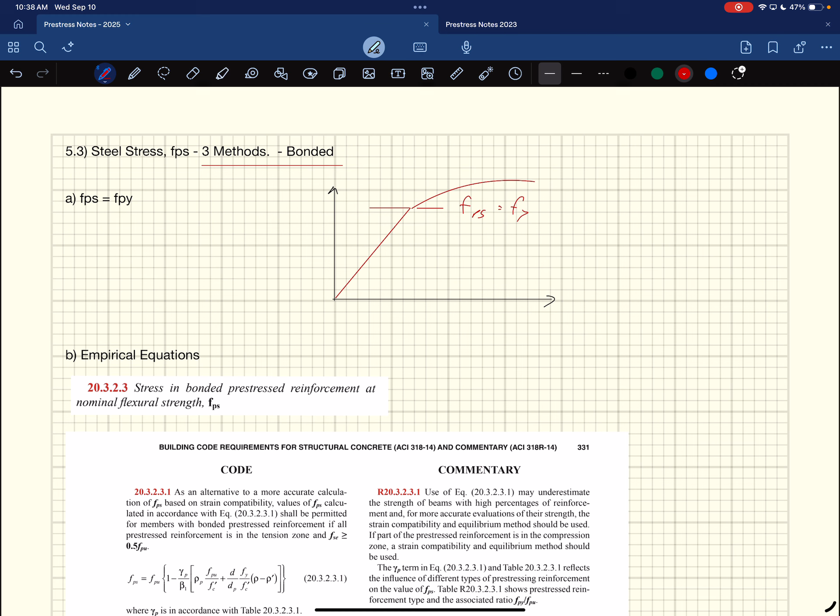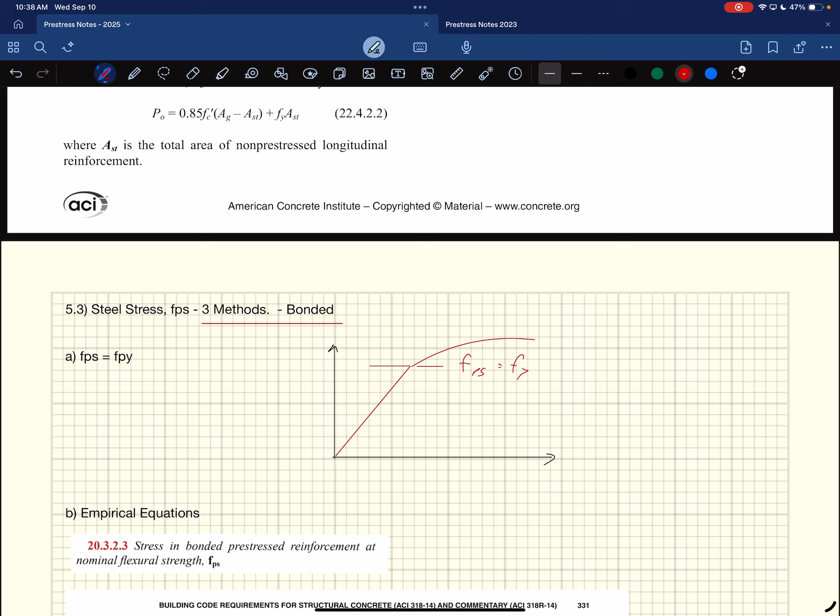So your homework this week is going to be a T-shaped section, and it's going to say calculate the moment capacity of a pre-stressed member where FPS is equal to FY. They're an empirical equation, so this is that 20.3.2.3 that the earlier section of code pointed us to, and there's your equation—that sucker right there.

It's empirical, right? So what empiricism does, what that comes from, is from a bunch of test results. They did a bunch of tests on some members, and then they developed this equation. They noticed my FPS value is going to vary based off of gamma and beta and FPU and its relationship to F prime C and rho P. So you have to go through and calculate all these values—it's not easy to use. But once you calculate all those values, you just plug them in, and it gives you a value for FPS, which will be really close to what FY is, but it's slightly different, and it accounts for all these other effects.

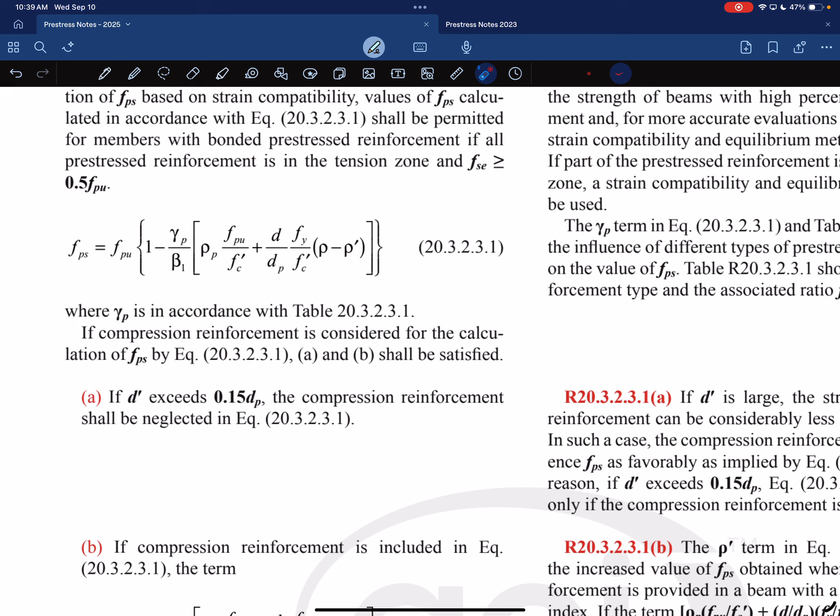Okay, things to be careful of when you're using this. You look at these, let me see—Table 20.3.2.3.1 tells you which to use for your gamma. So this is, I agree.

Concrete's weird, right? You should be getting used to this by now, especially if you took concrete last semester. There's a lot of empiricism, and it's pretty frustrating because the other thing ACI is really good at doing is not telling you everything. It'll kind of lead you and be like, oh, this is the value you should use, but there's still some unanswered questions—like, what do I use for that value?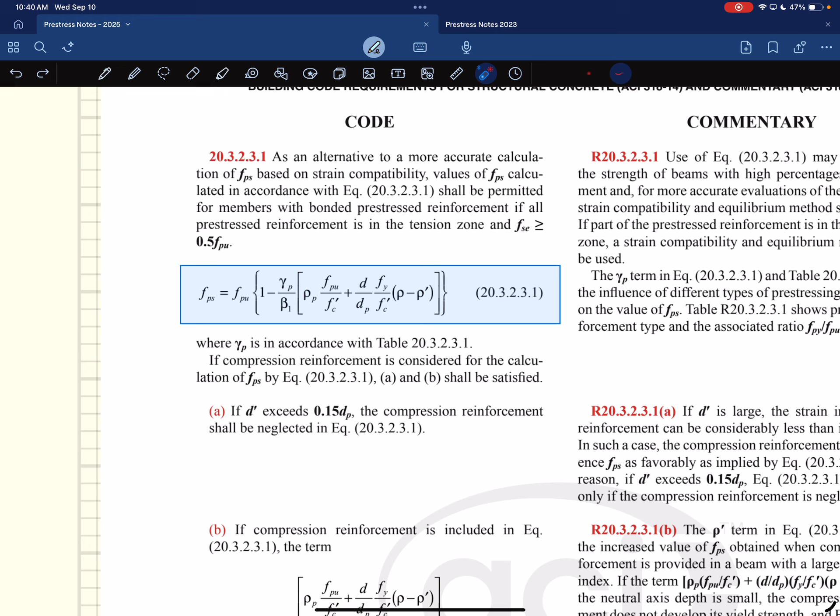So let's just look at some of these things to give you an example. Gamma value—sure, you come down here and look up gamma, based off of the FPY over FPU, so you'll be able to calculate that value. Beta 1 is the same beta 1 that gets used for the relationship between A and C, which is dependent on the concrete strength. If it's less than 4,000, it's 0.85, if it's between 4,000 and something else it ramps up, and then it's something else above that.

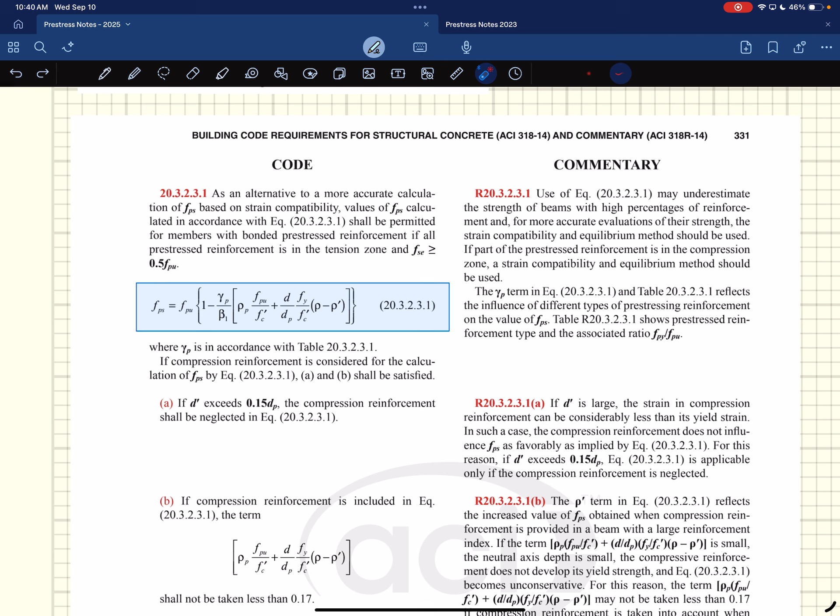See, this is what I say, the brotherhood—you just got to know this stuff. So that was beta 1, so gamma you look at beta 1. Rho P, right? Well, that's not even here. So that would be one of those ones where you have to go look it up at the beginning of this chapter—they have all the variables listed and tell you what it is. Oh, I'd have to look that one up.

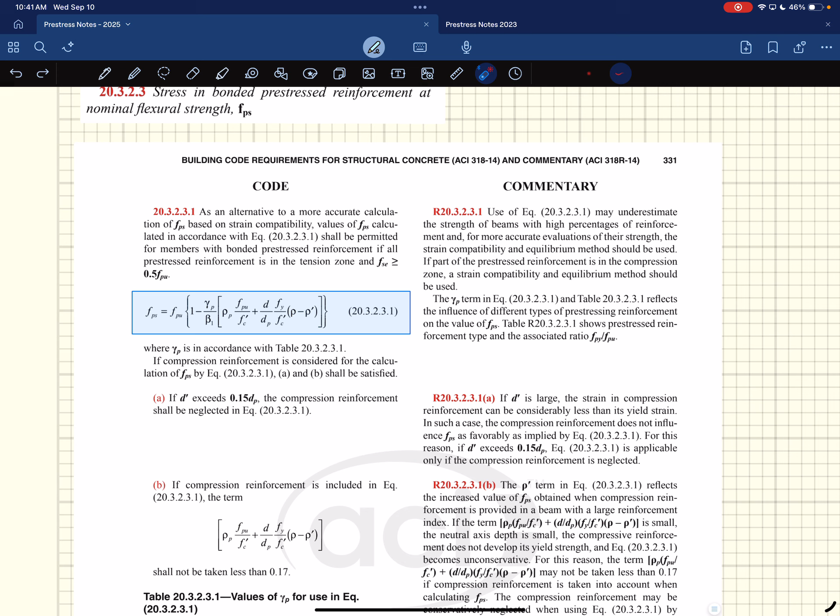But maybe next time, you need to. I know that in past homework, that question has come up a lot, and I can't remember the details of what's happening, but it has to do with what you do—I remember what it was. It has to do with the fact that I give you a T section.

Oh yeah, I can remember this. Isn't that the ratio? AS over BD? Yeah, AS over BD, right? That's what your typical rho is. See, brotherhood - Thomas is part of it. He remembers.

I'm not joking, in the past I got in trouble for saying brotherhood. A student took issue with this and reported it to the department head. I just mean it in a general term. Kira, Ahika, you guys are welcome as well. Everyone is welcome, I don't care. Everyone is welcome into the brotherhood. I started, and it was just like, oh what's this, what's this you're saying about the brotherhood? I'm just saying brotherhood and sisterhood and anyhood, right? Anyone's welcome to the hood. Let's just go to the hood. You got to be part of the hood to understand what's happening.

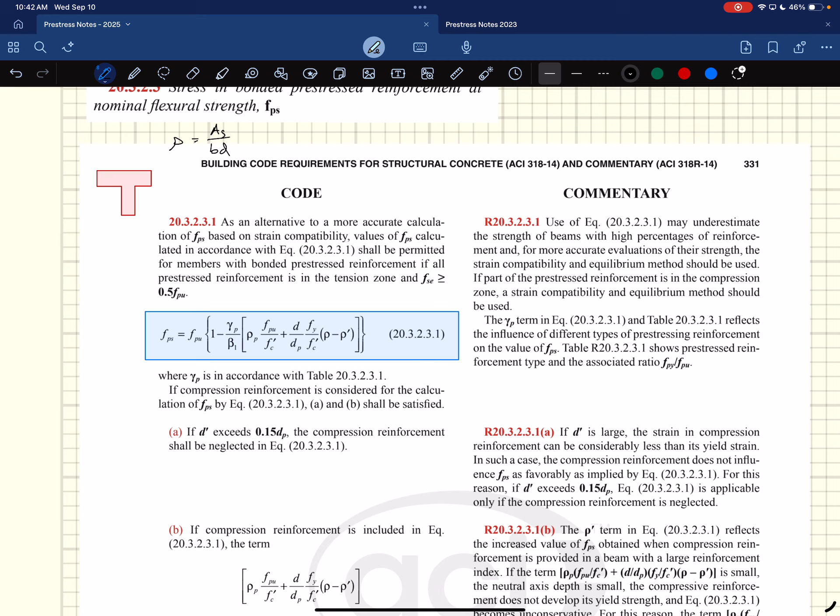So, right? And so this is, rho equals AS over BD, right? What do you use when it's a T section? Because this looks like a ratio between the area of steel compared to the effective area of concrete, right? B being this distance, and D being this distance, the distance down. Like in a rectangle, that makes sense. If I have the rectangular member, D is the distance down to where the steel is at, and this is B, and that's D right there. So that's B and D. The area - this area right here relative to the area of how much steel I put in there - that's usually what this is.

And the P on this refers to the pre-stressing. So the area of the pre-stressing, I guess that'd be APS over BD. So then what do you use for BD? Because I'm going to give you one where it goes down into the web, so it's not going to be just the same width as you go down. So then what do you use for that B? And you're like, oh shit, it doesn't tell you. It doesn't say anything about that in the code. And so everybody gives different values, because it'll give you different FPS values if you use a different rho P value.

But I'm going to tell you right now, it's still going to be this, because if you look back - three of you will do this - look back at structures 2, and you'll see when we first developed this equation, it looks like this is an area, but it's not. The B comes from the effective width of your block, and the D comes from the distance down to the steel. They're coming from different areas for different reasons. Even though it looks like it's an area, it's not.

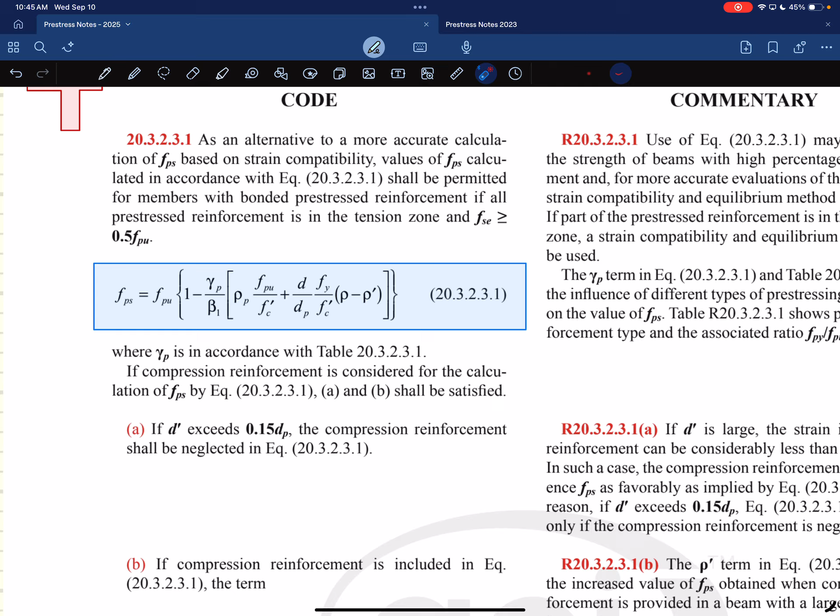But anyways, that just points out that the code - that's where it becomes engineering judgment. I think Tim talks to you about that a lot. There's a lot of times you'll get called upon, and sometimes the code does it on purpose - they're like, oh, we don't really know, let them do it, let them make their opinion on which is most effective. And that's my opinion on what you would do there. I'm a doctor, so definitely listen to me. Okay, so there's that equation.

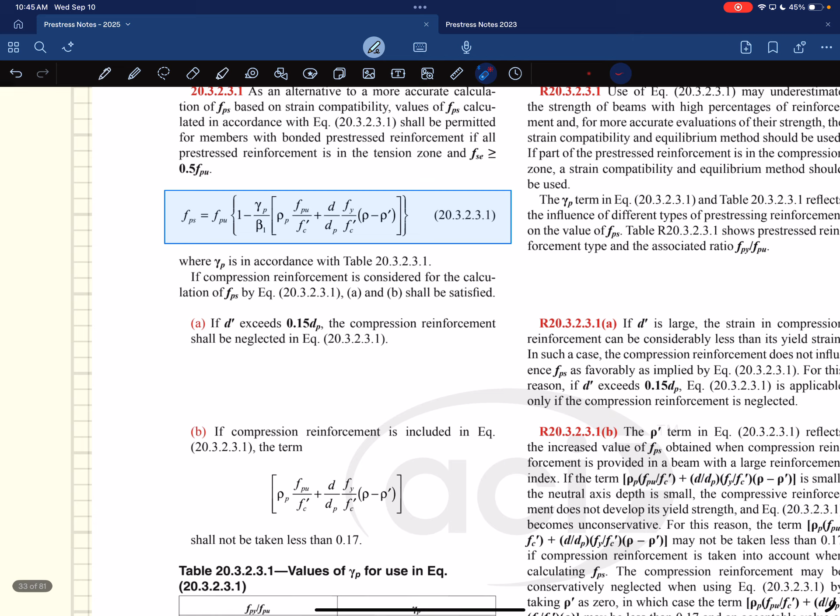So then let's see some other stuff. If compression reinforcement is considered for the calculation, FPS equation 20.3.2.3.1 - if you have compression reinforcement in there as well, it changes what to use for some of these values. We're not going to do it with compression reinforcement. Also, the other thing, a little foreshadowing - what you use, the prime there, talks about it's the area, it's the rho.

This is commentary 20.3.2.3.1, looking at the compression. I think in this case, since there's rho and rho P, this rho ends up being the same as this rho. But with normal reinforcement, this rho would have the normal reinforcement and rho P would differ. For our example, I think they end up being the same, because the amount of regular reinforcement we have is 0, so those end up being the same. Rho prime is how much compression reinforcement you have, which in your example we won't have, so that value would just be 0. I'm sure that's clear as mud.

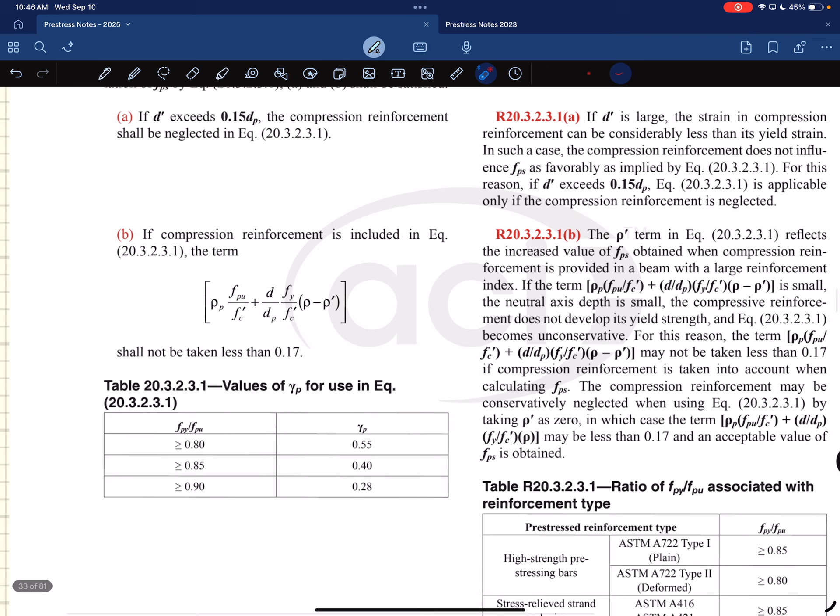Oh yeah, and then there's an added thing, putting a limit on it. This value would not be less than 0.17 if you have compression reinforcement. No matter what, it would limit out at 0.17. Again, just part of this empiricism. When they did all the testing, they found there was some limit on that. All these nerds doing deep research in concrete.

I have one equation when we go into bridges. From all of my PhD and over 30 years of doing structural engineering, I got one equation in AASHTO. And unfortunately, they don't call it the Berry equation. I really wish they did.

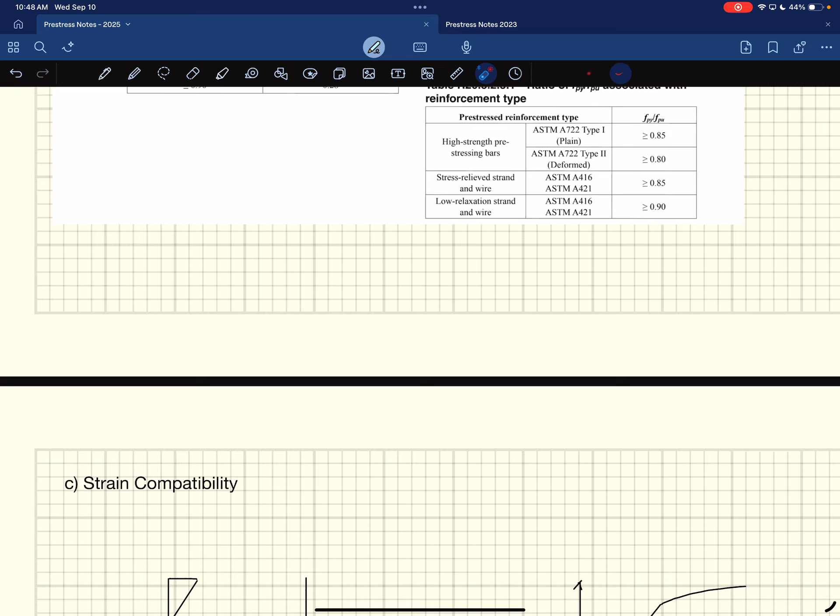And then also every time they use it, they have to ask if they can use it. You know what they would do? Fucking pull it. They'd say this doesn't matter anyway, fuck it, right? Okay.

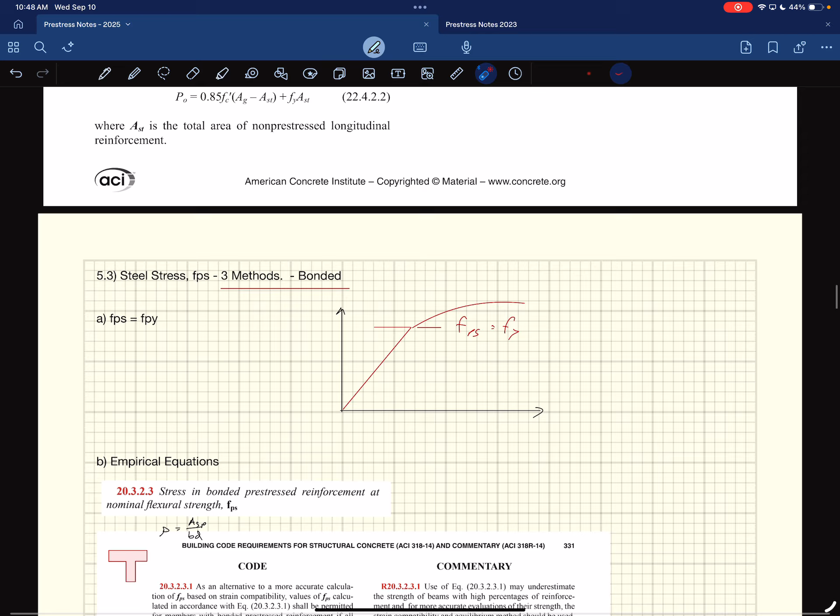So that's how you're going to do it for your homework. One, we just assume it's FPY, and one, you assume it's FPS. You calculate this - as I just laid out, that's not easy to do because there's a bunch of variables you have to calculate. I can see an Excel spreadsheet or MATLAB that does this.

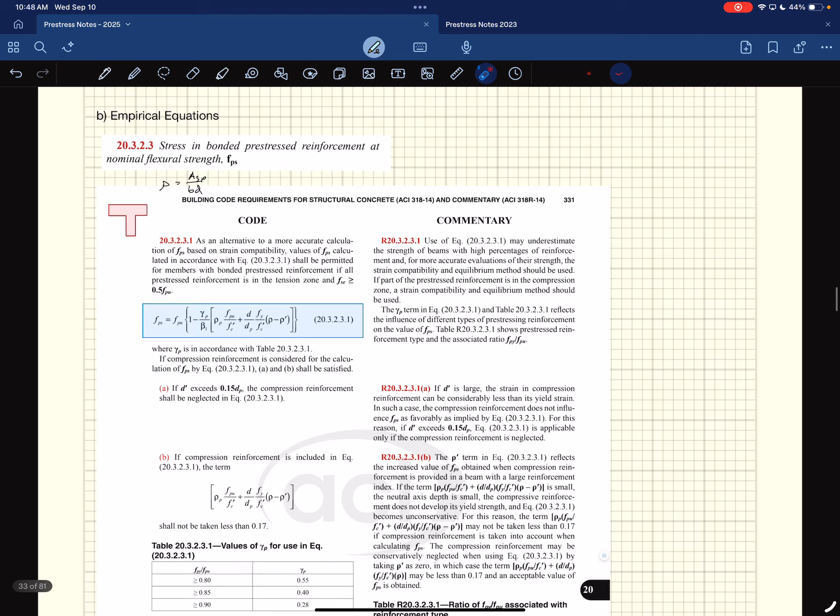This is the strain compatibility - this is my baby, okay? And Stanton spends a bunch of time talking about this, but it pains me to say, it is purely academic, right? It's so fun though. Purely academic, and we're just going to skim it.

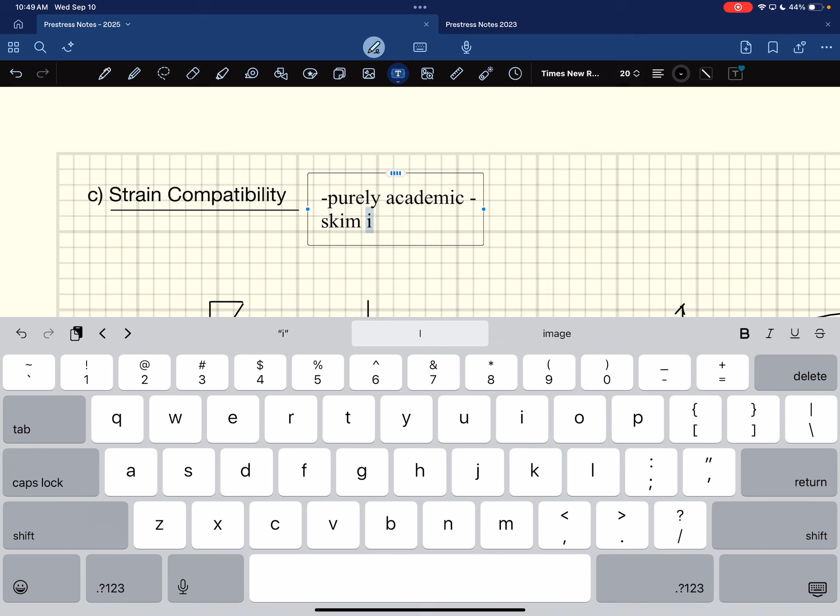I'll at least set it up, and then we won't talk about how to solve it. I haven't quite worked out how much I'm going to show you here, so we'll make it up as we go along. So we assume that this is 0.003. That distance there is x - we don't know what that is. You know what this is down here.

We'll call that epsilon sub pu. When, right before it fails, it's going to be epsilon sub pu, and that's going to cause stresses that look like this. So this all stays the same - these are all the same things happening: FPS, this is 0.85 F prime C, and this is the distance beta 1 times X.

Oh, we're out of time. Okay, we'll take it off from there next time. But I think just with one graph, I'll show you how you would actually do it, and then we'll say that's not how we're going to do it, but if you wanted to, you could do it this way.

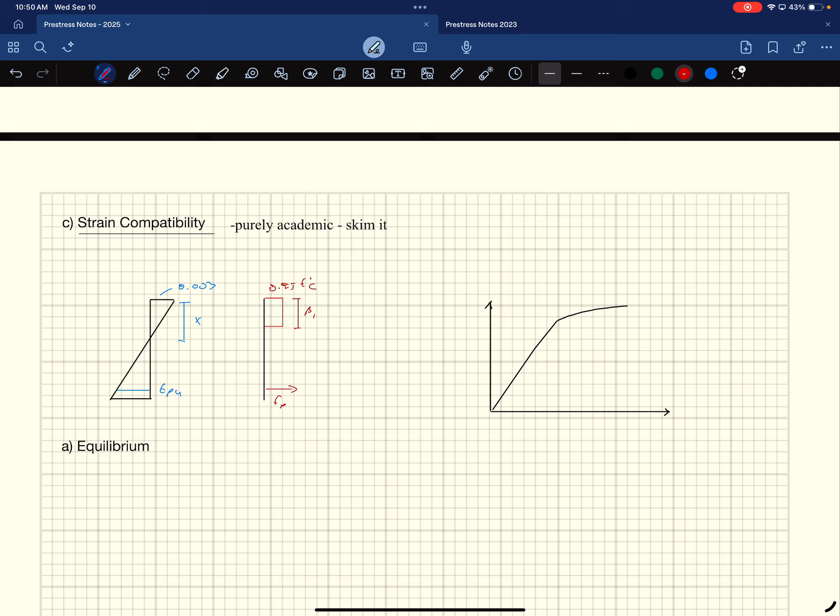And we'll skip a couple pages ahead, and then we'll jump on to shear capacity, which is - she's deep, she's deep, it is probably...